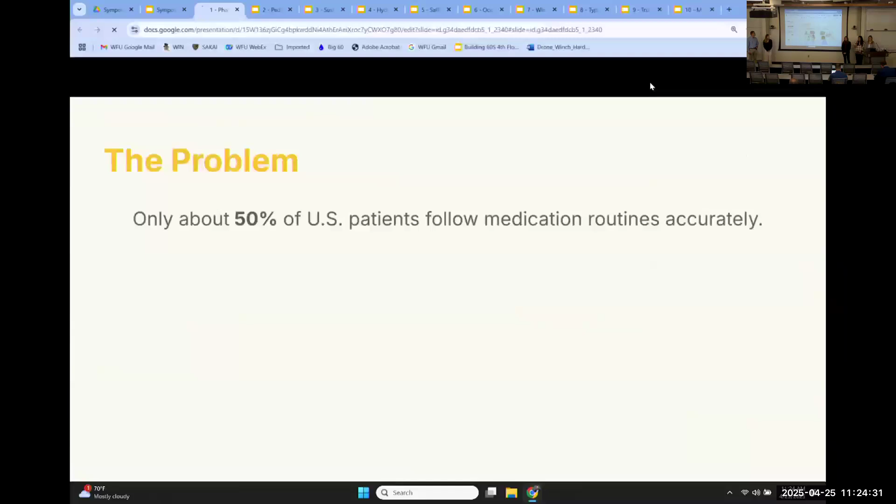So the problem is that only about 50% of U.S. patients actually adhere to their medication routines accurately, and this further decreases with increased age, increased dependence on caregivers, increased regimen complexity, and low health literacy. This results in consequences such as about $300 billion in annual preventable healthcare costs, about 67% of medication-related hospitalizations, and about 120,000 preventable deaths annually.

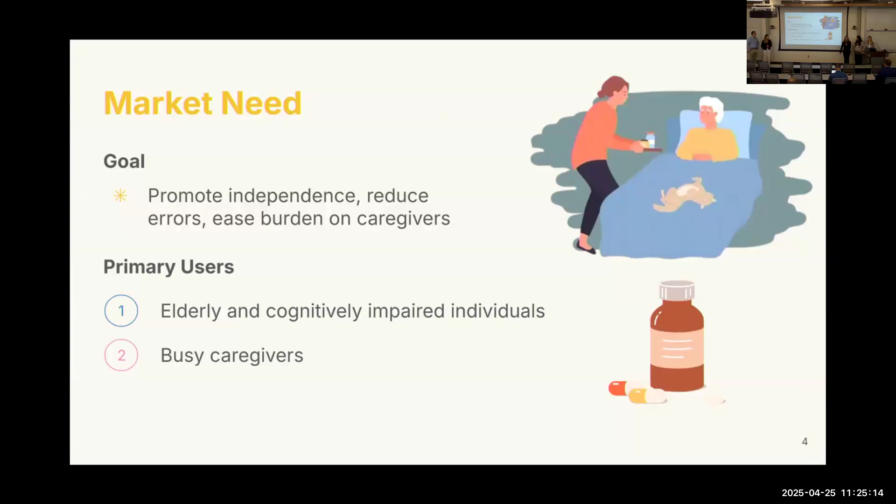Our market need and goal is to promote independence, reduce medication-taking errors, and ease the burden on busy caregivers. The primary users of this device would be elderly and cognitively impaired individuals, busy caregivers, as well as healthcare systems and home care services.

We've sorted the existing solutions into 3 separate categories. The first is pill containers, like pill calendars, which can range anywhere from $20 to $200, but the user has to manually put each dosage into individual compartments, which is very tedious.

Next we have prepackaged prescriptions—if you have a prescription with Amazon Pharmacy, you can get a pill pack for free with your dosages in them. These are made out of plastic, which is bad for the environment, and if you change your dosage, you have to order a fully new prescription, which can be wasteful. There are also fully automatic systems like the Hero, which require an app and Wi-Fi, and a lot of users complain about issues with setup and accessibility.

Also about the fact that this is a subscription service at $45 a month.

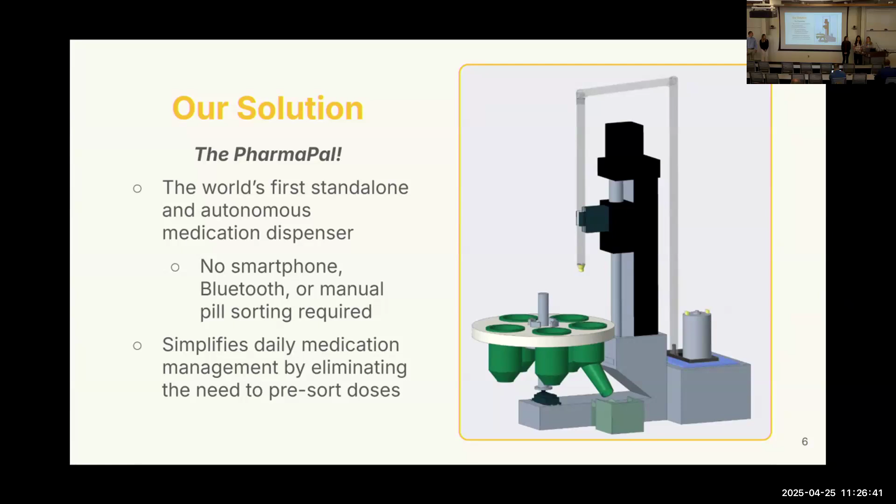Noticing the gap in the field after the team's background research, we decided to create a device that combines the good parts of each solution while tackling the more negative aspects of each. Through this, we created our device, the PharmaPal, the world's first standalone and autonomous medication dispenser. This is great for users because there's no smartphone needed, no Bluetooth, or any manual pill sorting required, drastically reducing the burden on both caregivers and medication takers by eliminating the need to pre-sort doses.

There are a few key components we incorporated into our project. The first is where do the pills go? Into the pill containers, which hold up to a 90-day supply. To choose which pill, we have a rotational motor that spins the pill holder around to pick up the pill.

We decided a vacuum pump was the best way to pick up the pill, since there's not much friction and it allows for ease of use. The vacuum turns on, and a linear actuator pulls it up and down to pick up the pill. Then to test that we have the pill, we use a pressure sensor.

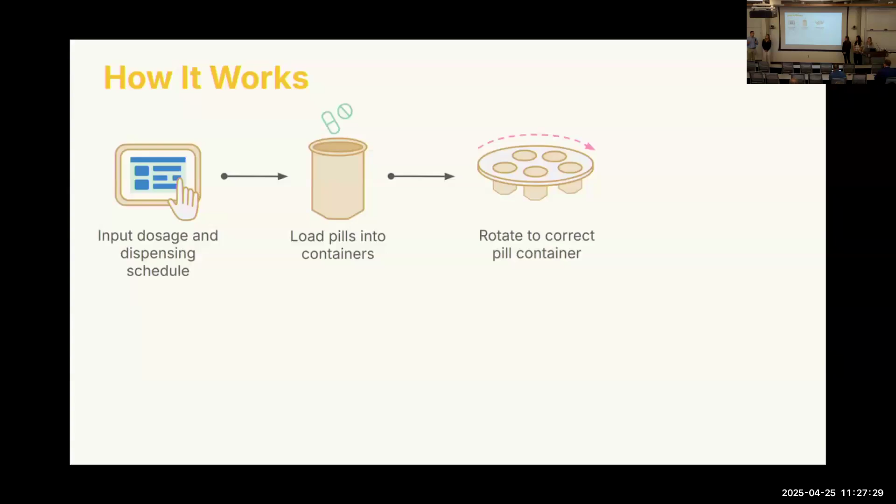I'll go over how it works. You input your dosage and scheduled time, then load the pills into the containers, up to a 90-day supply. At the right time, the device spins the rotational motor to the correct pill, the linear actuator goes down to the bottom of the pill holder, and then picks up the pill with the vacuum.

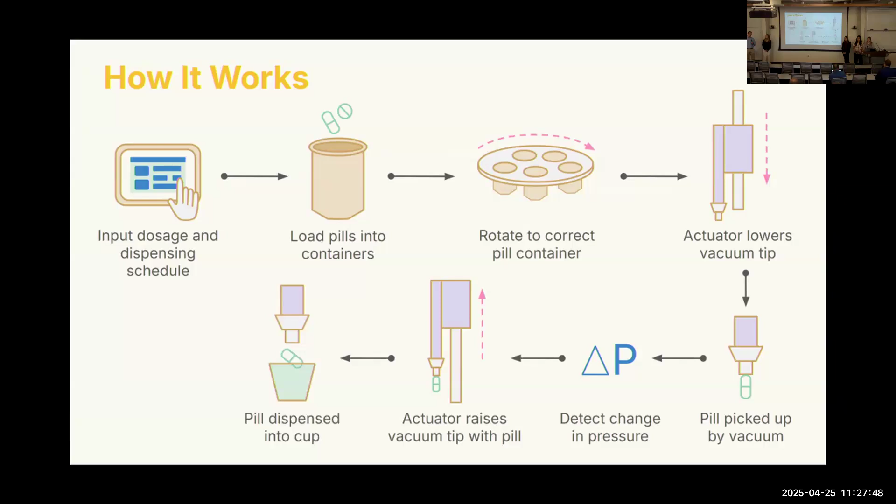The pressure sensor then checks the pressure. If the pressure decreases, meaning the vacuum has made a seal, it continues up. If not, it tries again, rotating the linear actuator or rotational motor again and dropping the pill, repeating as many times as needed.

While it seems pretty technical behind the scenes, it's very simple for a user in their daily routine. First, you input your dosage and dispensing schedule for each medication type. There are four different types of medication you can put in, each with up to a 90-day supply, loaded into their designated containers.

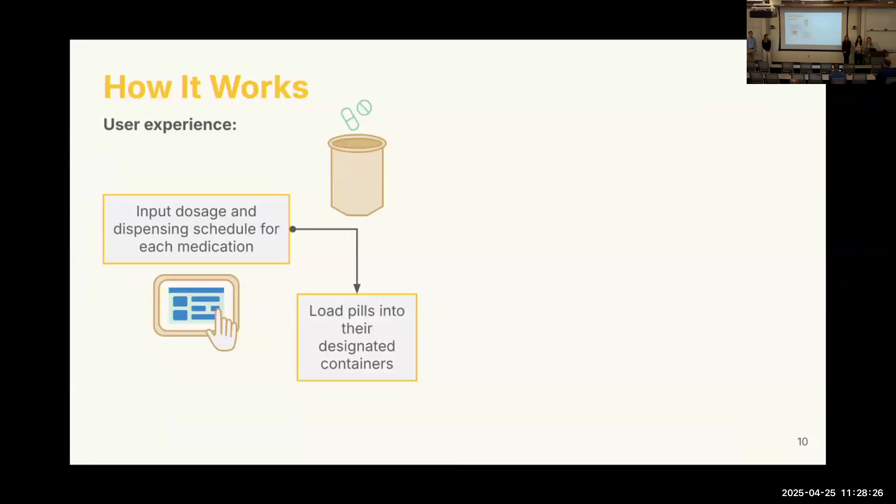Then we wait for the dispensing time, when the machine begins its process, rotates around, picks up a pill, and finally the user collects it from the retrieval cup and takes their medication. This makes it very simple for anyone with cognitive disabilities or increased age.

During our testing phase, we've looked at three specific factors: dispensing accuracy, dosage accuracy, and timing accuracy. Dispensing accuracy relates to the successful pickup and dispensing of a pill into the retrieval cup. Dosage accuracy relates to the correct amount of each pill type being dispensed, and timing accuracy relates to confirming pills are dispensed at the scheduled times inputted by the user.

We've conducted exactly 300 tests with a 90% success rate, and within the last 268 tests, we have a 100% success rate. So we are confident in saying our device is 99% successful over a 90% confidence interval.

Going forward, we'd want to add a filling function to help users fill the pills easily, as well as code to count and verify remaining pills in the container, with a weight sensor to weigh the total 90-day supply, and as pills are dispensed, recalculate the weight to check for remaining pills.

We'd also want to focus more on testing specific cases, like when there are only a few pills left in the container, and make the device battery powered in case power goes out. We'd also want it to support more than 4 medication types, and lastly, instead of using Arduino, especially for our interface, we'd want to use Raspberry Pi, because the user interface with Arduino caused us a lot of problems.

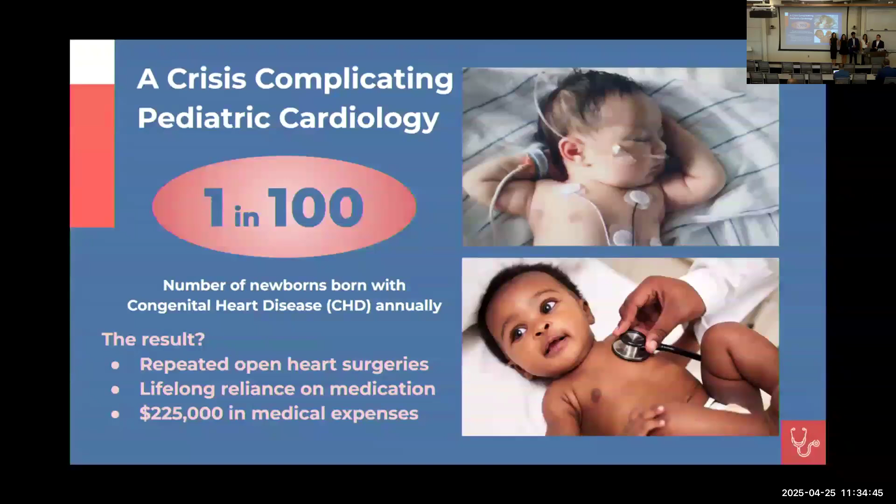So why the PD valve? Currently, there's no device that exists for catheter-based aortic valve delivery in infants. There are only two options. The first is open heart surgery, which is costly and invasive. The second is constant monitoring of conditions during childhood, which poses immense risk. What do we need? We need a safer, less invasive solution.

We looked into materials such as cobalt chromium as well as nitinol for the frame, to leverage existing mechanical properties within the space, as well as Gore-Tex/ePTFE for the skirt, because of its biocompatibility as well as reduced risk of immunogenicity. We even considered coating the metal frame with an anticoagulant drug such as warfarin.

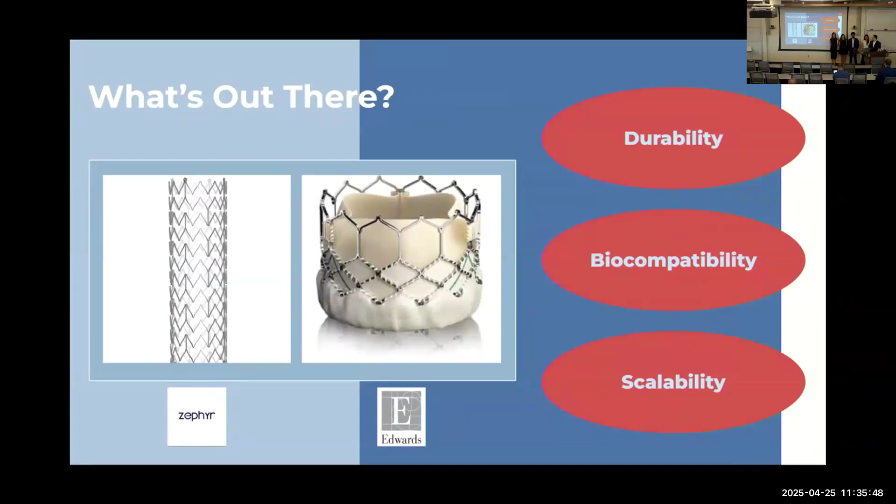To ensure that we weren't designing this product within a vacuum, we consulted an array of pediatric cardiologists as well as cardiothoracic surgeons to gain useful insights into what the main obstacles are within the space of pediatric heart valve care. We identified that for our patient demographic, there aren't many minimally invasive interventional procedures available, and many of these patients have to undergo high-frequency interventions over their lifespan, even becoming overly reliant on long-term anticoagulant use.

With this newfound insight, we took a step back and analyzed under a clinical as well as engineering lens what the most important features were that we were trying to accomplish within our device, in order to move in the right direction and in accordance with our time as well as resource constraints.

We took our gear to SolidWorks. This is a software that we use to create the valve. You can see our early iterations right here don't exactly match what we were looking for—they don't look exactly like what was shown.

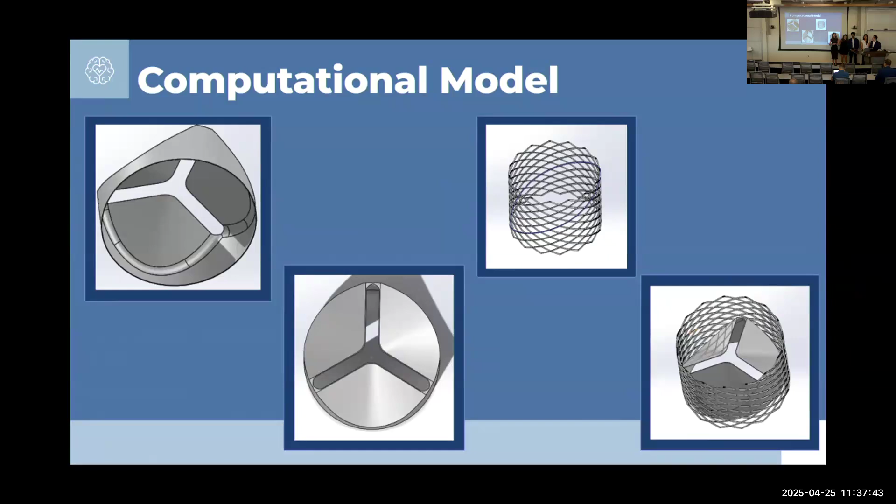So this brings us to our final prototype. This is our SolidWorks model. It's made out of PTFE, which is a plastic fabric—it's incredibly durable and non-reusable. It's surrounded by a nitinol and titanium cage. As you can see, there are two separate parts here, and then we can combine them together. This model can be used for computational fluid dynamics.

So what does this look like off the screen? We were able to actually create some prototypes. These are all to scale physical fit-testing models. You can see that we have a cobalt chromium frame in an early iteration layer.

It was a bit too stiff and a bit too wide for what we were looking for, so we switched to nitinol. It's a lot more flexible and durable, and can actually adapt to a little bit of growth in the child's heart. Additionally, a child's heart has less blood pressure, so it would be good for that.

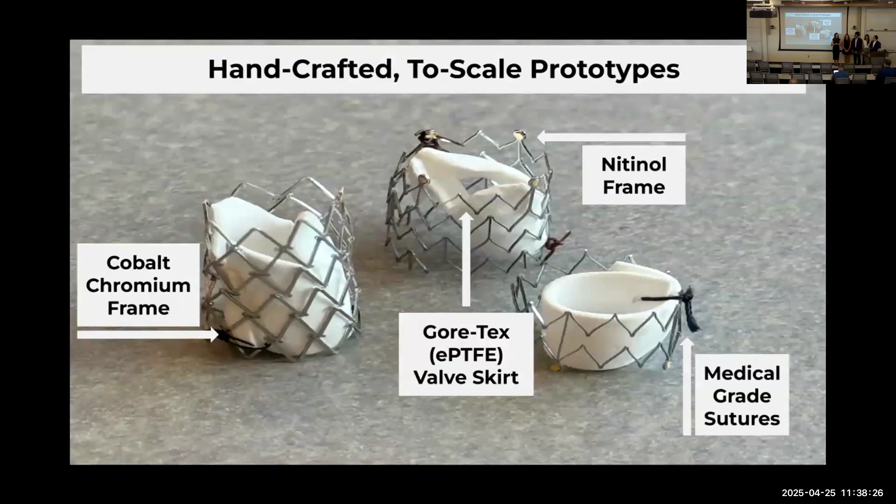So not only did we create physical prototypes, but we also really needed to focus on a computational model to show that our valve could withstand the pressure and velocity seen in blood flow. So this is just an example here of, at max blood pressure, what the velocity of the blood going through the valve would look like.

This shows the pressure and velocity and what the difference in gradient is between flowing through the valve, and this was created based off of values found in research with this size valve, as well as through calculations.

We're very proud of everything we've been able to accomplish throughout the year, and we've gotten nothing but great feedback from all our stakeholders. We've been able to create a modeled valve, simulated performance, as well as prototype design. These three big accomplishments have allowed us to bring a drug-free future as well as transcatheter access.

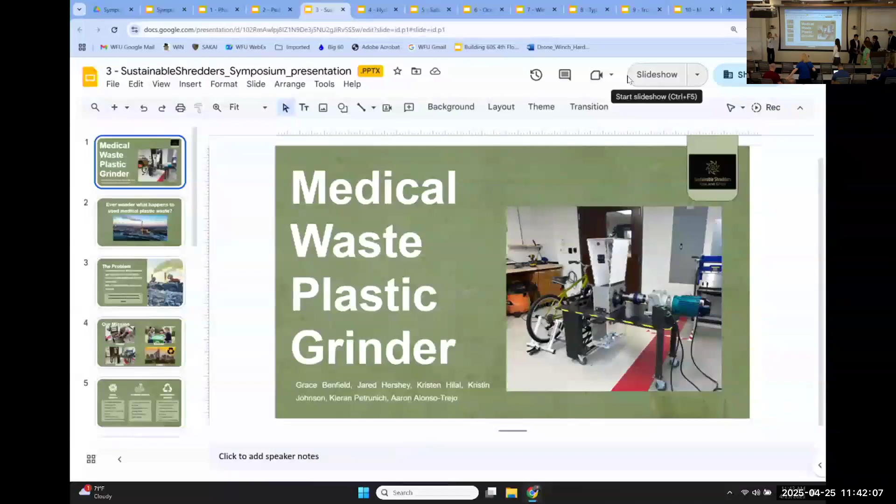Oh, whoa, weird. How'd that happen? Okay, weird. All right, sorry y'all. I guess we were testing these. We overplanned. Thank you for letting me know. Do y'all want two different?

Hi everyone, we are the Sustainable Shredders, and for our project we built a medical waste plastic grinder to be implemented in Atrium Health's new STEM lab in Charlotte, North Carolina.

Have you ever wondered what happens to used medical plastic waste, like pill bottle containers or syringes? A lot of these plastics that present no biohazard risk still end up in incineration plants. So our thinking was, how can we use this plastic for something better?

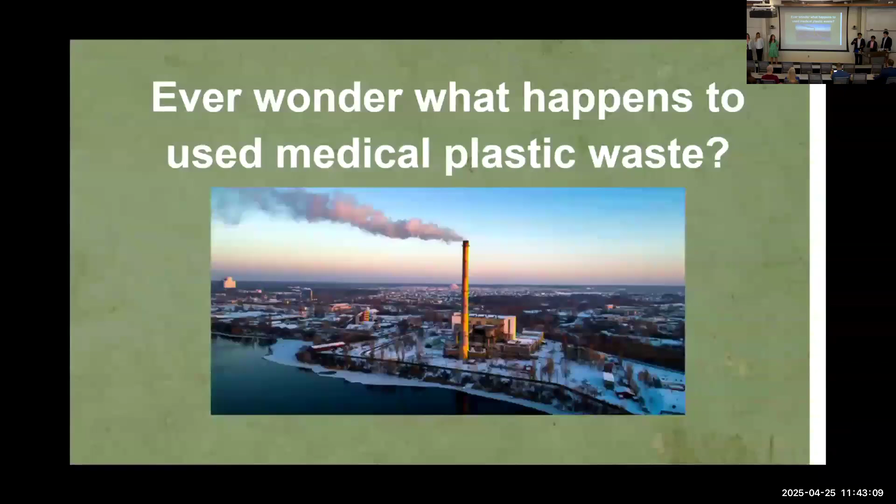So we designed a medical waste plastic grinder that can help upcycle these plastics and teach students about upcycling and engineering in a creative manner.

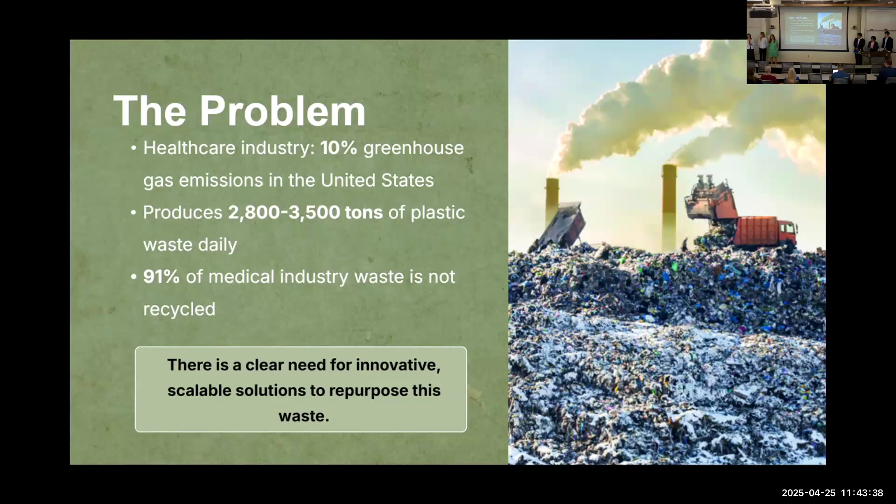Let's take a step back and think about the broader impact healthcare has on the environment. The healthcare industry produces 10% of the greenhouse gas emissions in the United States, which is a huge amount for a sector meant to heal people. It produces tons of plastic waste daily, and 91% of this plastic is not recycled or upcycled in any way. So clearly there's a need for an innovative, scalable solution to take this waste and repurpose it.

Our mission statement is that not only do we want to create a machine, but also be interactive with other students and educate them about the positive impacts of sustainability and upcycling, and even educate them on real-world power and energy concepts through our plastic grinder. We also try to inspire future engineers and lead the charge in Charlotte, North Carolina regarding the plastic medical waste crisis.

Looking more closely at some of these impacts: first, the social impacts. We're going to help educate students on sustainability and engage the local community in upcycling efforts, and we will also help support Atrium Health's STEM initiative in their new hospital.

Economically, this could help hospitals possibly save some money. Instead of paying someone to get rid of the plastic, they could possibly reuse it. Scaling up this project could help add to the savings, both in disposal costs and in the value of what the plastic becomes.

Looking at the environmental impacts, we can help reduce plastic waste through upcycling. We can also use our bike-powered system to not always use that motor and create fossil fuel emissions that way. And we can also promote a circular economy in healthcare, which Kristen will talk about more.

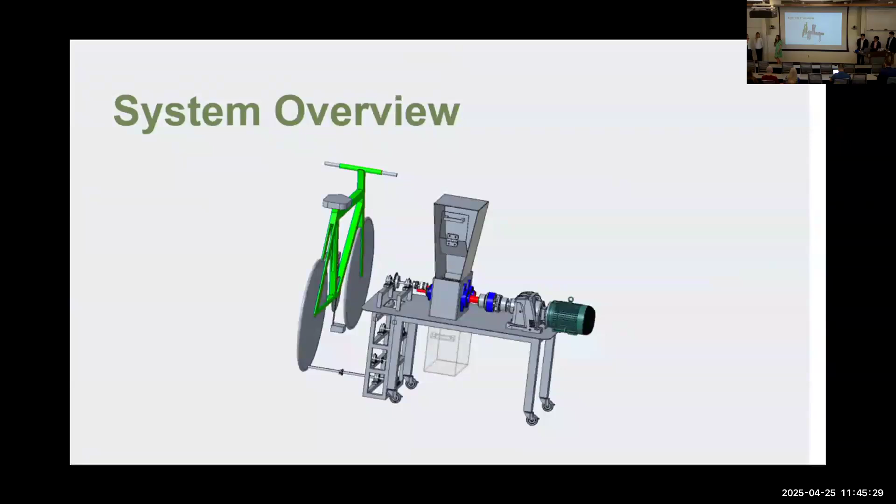Our solution is a closed loop solution that connects healthcare, sustainability, and engineering. It all starts at Atrium Health, where by treating patients they throw away tons of single-use plastic devices every day. This plastic gets collected and given to our project.

The students in the exhibit can input the plastic waste through the chute at the top. The enclosed acrylic chute promotes sustainability, accessibility, and education. The plastic waste falls onto the grinder blades, which get power from either a bike or a motor, and then turns into plastic flakes. These flakes will be used for upcycling, either in 3D printing or injection molding, any way to make other medical devices that will ultimately go back to Atrium Health, closing the loop and reducing waste.

So comparing our two sources of power, we have a motor and gearbox and a bike and chain. The motor and gearbox represent more of an industrial solution that can be upscaled to really create a widespread difference in the plastic issue. This is a really high power solution, taking 230 volts from the wall. But this also represents kind of the downside, where this is not something that everyone can access.

It's also really expensive and just not really feasible for the everyday person. On the other hand, the bike and chain is kind of more of an approachable solution that anyone can reasonably do with some money and some engineering skills. This is allowing us to really educate people on how much power is going to be needed to grind up plastics. And the downside of this is that human power is less powerful than the wall power.

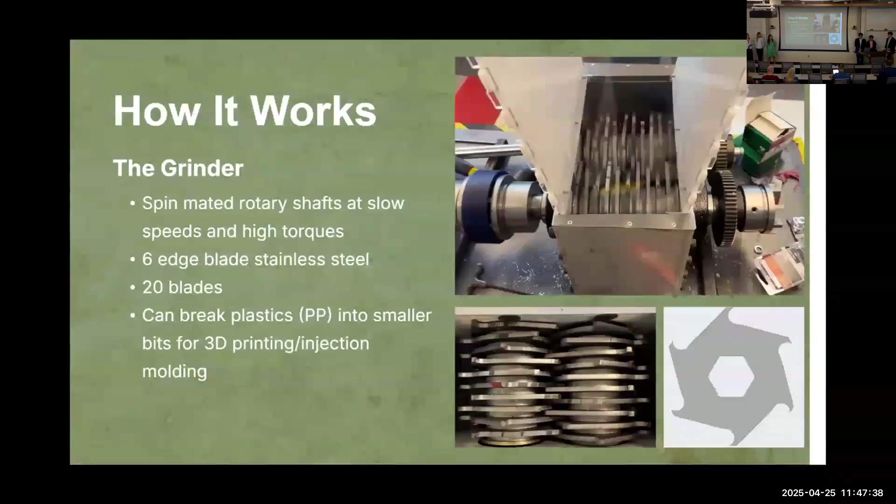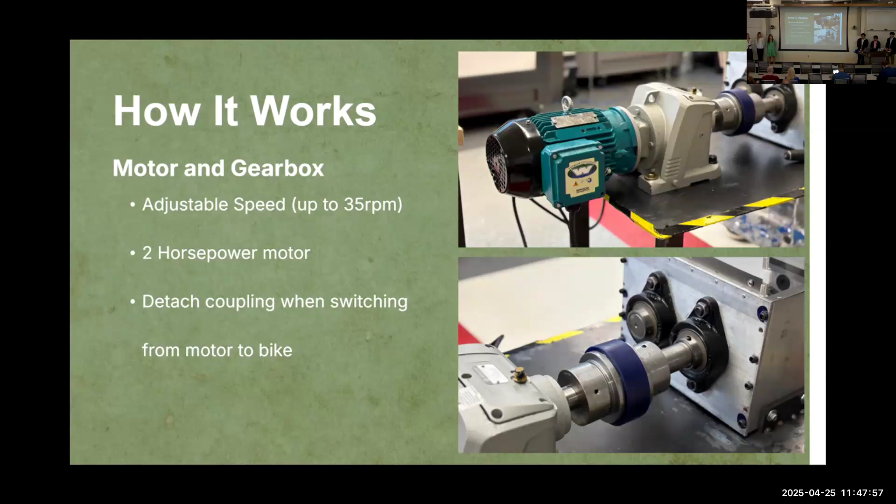So here you can see the motor and the gearbox. The gearbox is the silver element on the right, and the motor is the blue one on the left. The motor spins at a very high speed but low force, and the gearbox just reduces that speed to get our force up to the necessary amount. This is really expensive, but it's high power.

Now looking at our bike system, we had to make a few modifications before we could apply it to our system. We wanted to lock the rear gears to prevent the user from interfering with any added parts that we had. We added a second chain to the back cassette so that we could take the output from the human and put it into our system. We also removed some unnecessary components like the kickstand and rear brake just to declutter our system.

So now once we get the power out off of the bike, we have a custom-made gearbox. We use chains, gears, and bearings to increase the torque and decrease the speed. And like Jared was saying, to get that similar torque output used to grind plastics, we need to reduce it more, and we have a lower speed.

So what's coming up next is that this project will be a continuing Capstone project for next year. There will be a need to see some improvements, such as refining the grinding system, making it more aesthetically pleasing, and then adding to the application material.

So then after that, as Greg said in the beginning, this will be going to Atrium Health's brand new STEM education center, where students from kindergarten through 12th grade will be able to use it as a part of sustainability programming, and hopefully help us create a cleaner future. Thank you.

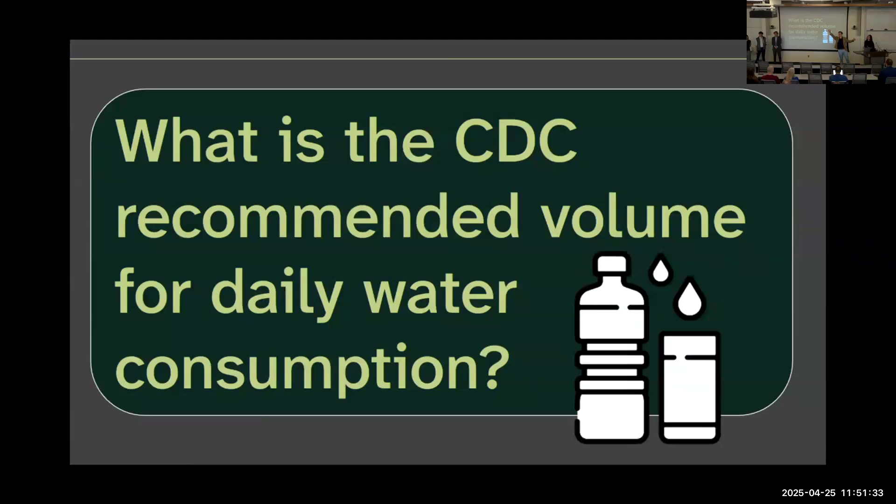Can anyone here tell me what they think the CDC recommends should be someone's daily water consumption in liters? Five? Can be more than that. Good guess. So, hands in the back. Seven? Still more than that. Anybody? In the corner there, you got a guess? Ten? Oh, we're gonna double that. It's actually 20 liters per day. And so, for context, that's about 80 cups of coffee.

To address this, our main stakeholder, Dr. Dickinson, designed a gravity flow scheme, utilizing the power of gravity to deliver fresh water from higher elevations down to these local communities in the Rwenzori Mountains.

Here's how it works: there's a river up in the mountains. This goes through a slow sand filter where all the contaminants are filtered out, making it potable. That water is then stored in a reservoir where it can be pulled using gravity through pipes. However, when you go through these pipes, a lot of pressure is built up, so you have to release that pressure back to atmospheric pressure in things called break pressure tanks, seen there. From there, it can be delivered at a safe pressure and a constant flow rate to local taps, delivering fresh water to these local communities.

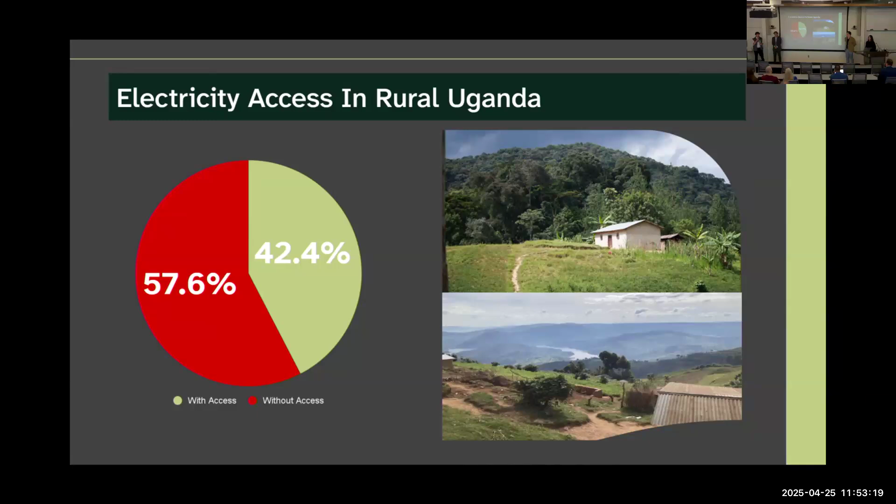Now, having addressed the issue of water, he realized there was another issue: electricity. In rural Uganda, roughly 57.6% of people don't have access to electricity, and in these really remote locations, that number is a lot higher. So what are we going to do about that?

Given these twin issues of water access and electricity access, we derived a set of system requirements we want our solution to address. The first one, and our biggest priority, is actually drinking water. First, we want to maintain the pressure and flow rate at the access taps. We also want to avoid contaminating the water since it is drinking water. And finally, we want our system to be resilient enough to last the 20-year lifetime of the gravity flow scheme.

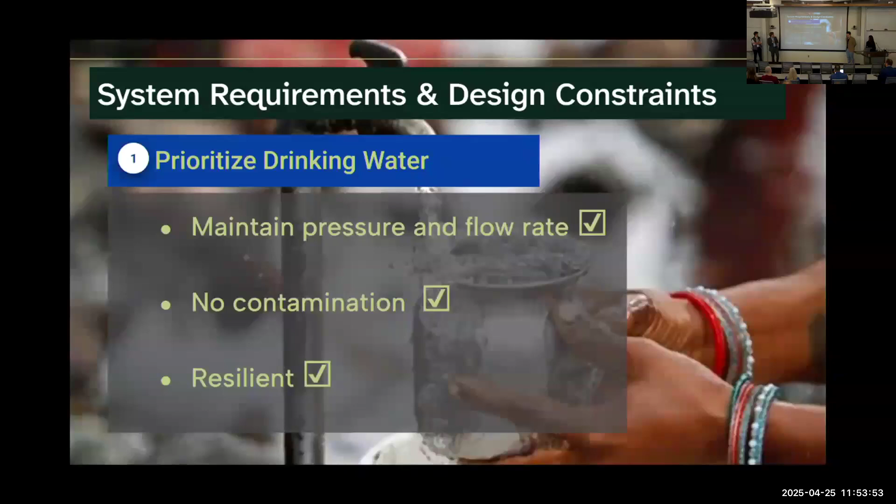The next thing we want to do is provide electricity. We want to be able to do this safely, and in a way that is accessible to the community, as close to where they live as possible. Finally, we want it to be temporally accessible as well, so that electricity can be accessed even when water is not flowing through the system.

The last thing is also on that theme of accessibility. We want our system to be modular, meaning it can be implemented anywhere in the gravity flow scheme. We want the parts of our system to be purchasable in Uganda, and we want them to be available at a reasonable price so our community can afford the electricity.

So what do we plan to do about this? That's why our team has designed a hydroelectric generator designed to work with the break pressure systems and tanks in the gravity flow scheme, comprised of a Pelton turbine and a permanent magnet alternating generator that will take all that pressure and turn it into energy we can use.

If you can recall, this is the visual map of it. This is the service area where all the water's being drawn from, and all these yellow squares you see here are the break pressure tanks. Our team picked out a square here in the middle where we found we could get the most available power that is near the most amount of residents in the area, so it's more easily accessible to them.

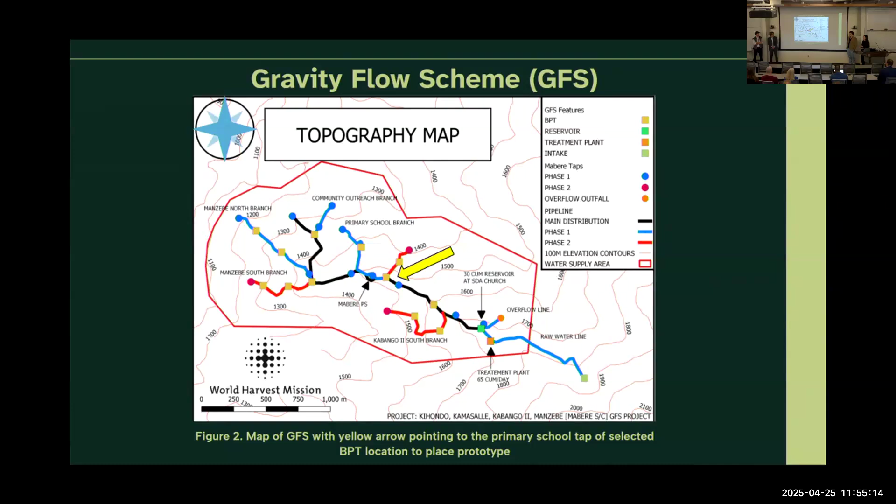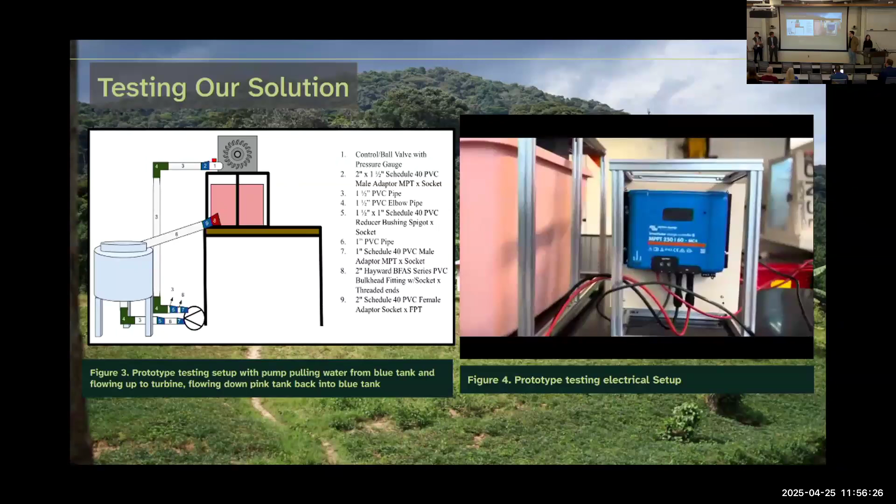On the electrical side, as the Pelton turbine spins, it's attached on the back to a permanent magnet alternator. This creates electricity while it spins, going through a charge controller, which effectively controls the current coming in, making sure the batteries don't overflow on current, then through a battery management system into 4 lithium iron phosphate batteries in series, totaling 12.8 volts, into an inverter, and finally to our end user where we can charge.

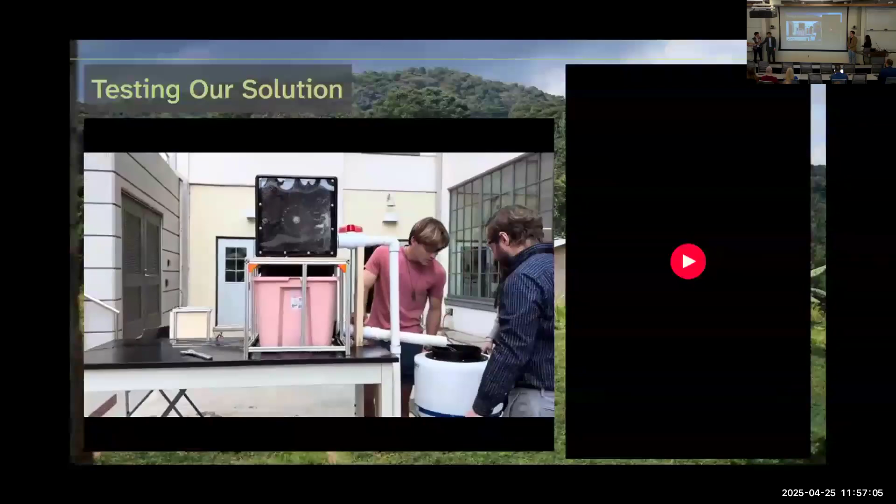So this is more of a close-up of the turbine. As you can see, it's running pretty fast right there, so it's hard to get a good visual of it. And then right on the backside, simultaneously, the generator is also working with it to produce that power.

So having tested our system, the first thing we noticed is that our pump actually was not able to match the conditions we were expecting in Uganda. Instead of giving us 55 meters of head at 1.5 liters per second of flow rate, we instead got 30 meters of head at 0.6 liters per second. This means instead of having access to 780 watts, our turbine instead only sees 180 watts. We're still able to produce power, about 40 watts at 22% efficiency, but we were expecting to get 460 watts at 58.9% efficiency.

However, we are not dissuaded by these results because of the way that our alternator works. The alternator is designed to work at 1300 RPM, and it's only given 500 RPM. Alternators have higher efficiencies at the speeds they're rated for, so 1300 in this case, and they'll have a much lower efficiency at a lower speed like the one that we gave it.

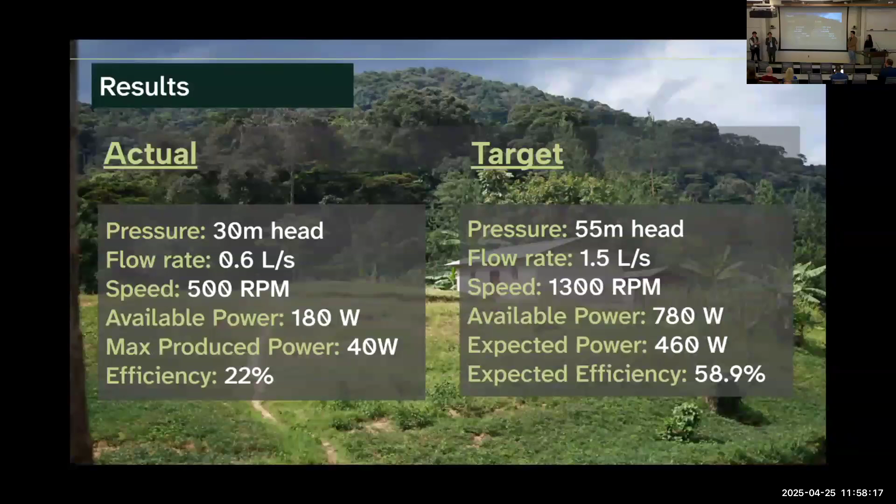So given that we're not able to verify our expected power, we were able to demonstrate proof of concept, and we were able to show that we could produce, store, and deliver electricity safely and reliably.

So where do we go from here? First thing we want to do is be able to actually simulate full conditions of the system in Uganda. That means getting a stronger pump, hooking up to our system, and actually getting that 50 plus meters of head and the 1.5 liters per second flow rate. We also are thinking there are ways we can adjust the nozzle diameter, maybe to give us a better flow or a closer flow to our actual system. And then we want to prepare future teams, hopefully, to continue this project to get it closer for potential actual implementation in Uganda.

Thank you all, and let's make every drop count.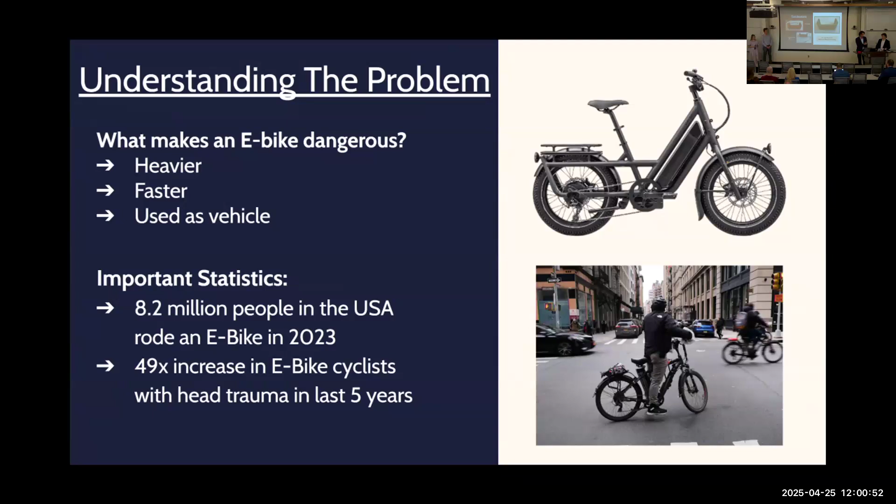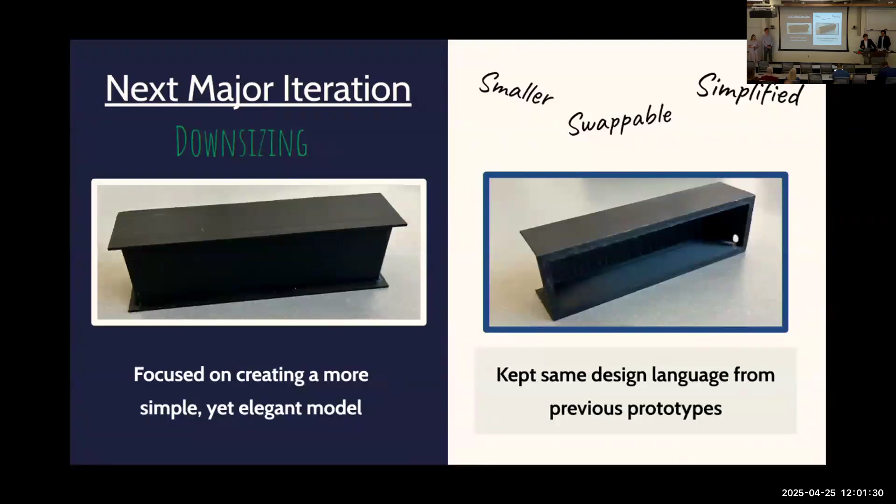It's smaller, it's swappable, and it's more simplified. The issue with this one, though, was it was not optimized for our internal electrical components. Finally, we then moved to the final iteration, which has a sleek design, more optimized space, better lighting angles, and it's made entirely out of glass fiber ABS, which is better for weathering conditions.

So while we were figuring out the shell, we were also figuring out what light we were going to do, because it's a brake light. So we ended up deciding on 4 different modes: standard setting, slow braking, extreme braking, and turn signal.

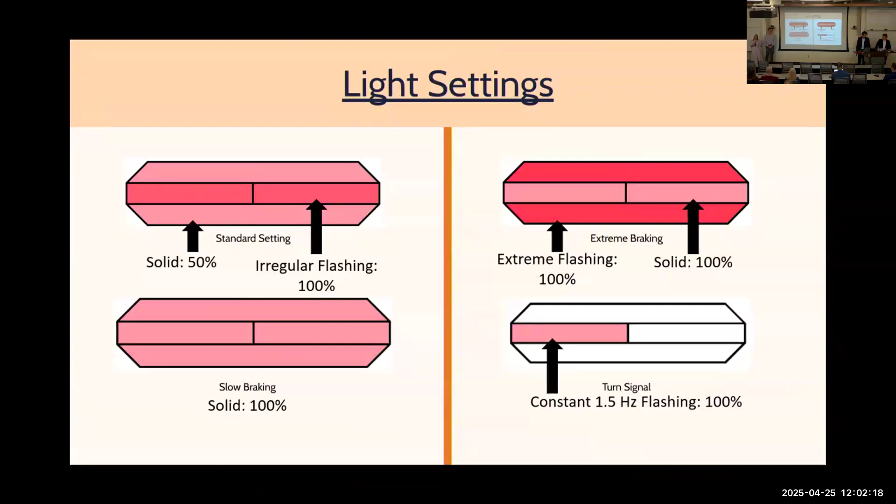On here you can see what each one's going to be flashing. Basically, the standard setting is you're just riding along, not slowing down, just having fun. Slow braking is kind of self-explanatory, you're slightly braking. Extreme braking, Bambi is in front of you, we don't want to hit Bambi, so you're extremely braking. Turn signal, also self-explanatory, but we have a Bluetooth module connected to the handlebars where you're able to press the button that indicates the direction you're turning.

Once we figured out the lights and had the shell, we had to figure out what we were going to cover the lights with, so our lens cap. We 3D printed using a red translucent PETG filament, which is stronger than PLA. The design is supposed to perfectly fit the outer casing of our shell while also providing great light diffusion. So now that we understand what we're working with, let's talk about the testing and engineering behind our product.

Let's get into really the heart and soul of the adaptive brake light, the electrical system. This system is built on an Arduino Pro Mini, which is really the brain of this entire operation. We chose the Pro Mini because it's a compact size, it is very capable for what we needed it to do, and it has good memory capacity for the programs we would be uploading.

This interfaces with a GY521 accelerometer that captures acceleration data from the bike as the rider is going along and braking at different intensities. With this information, the Arduino makes a decision to activate one of the 3 different braking settings. But how does the Arduino decide when to activate which setting? For that, we had to find some braking thresholds.

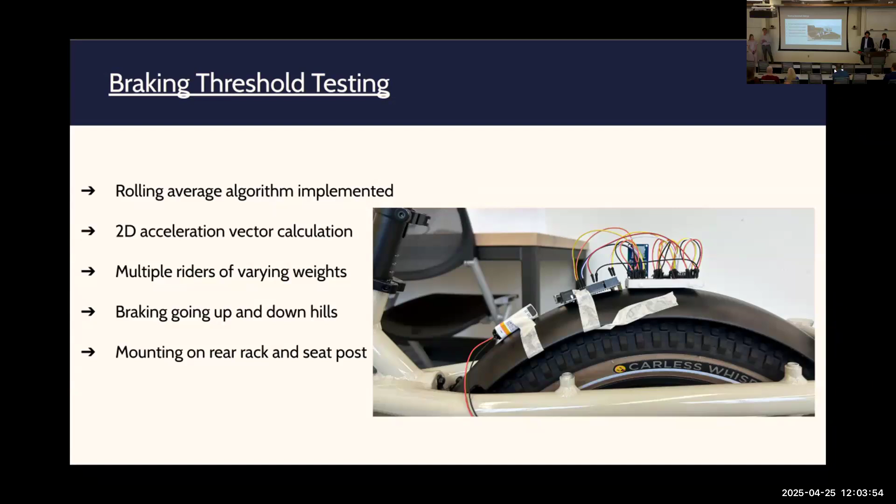To identify these thresholds, we did some testing and created a test module that we placed on the back of the bike, and we ran several tests with a few different riders, different stopping distances, and different starting speeds. From these tests, we developed our 3 braking thresholds.

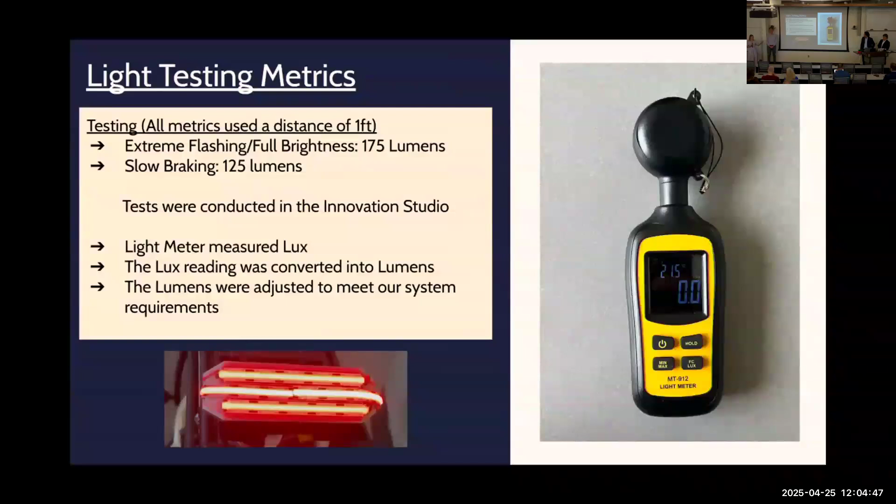And we've done some testing on the reliability and accuracy, and the distance between the handlebar and the adaptive brake light on the e-bike.

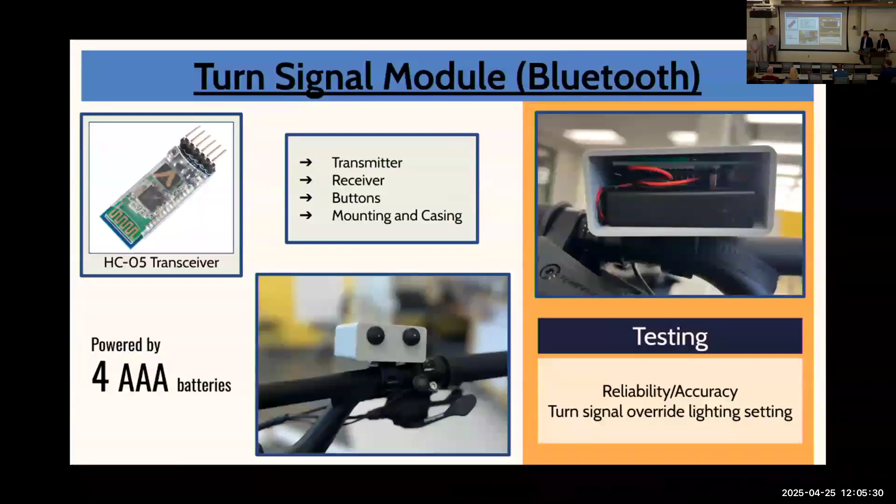So now that we understand exactly what we're working with, let's see how it works. Johnny's going to quickly explain what you're about to see in the video. So we have a video of our prototype.

Unfortunately, this morning we were having some issues with it, so we could not bring the working prototype in here.

In the video, you will see we have our 3 different braking modes: the standard, slow braking, tilted up, and then all the way up to that extreme flashing. We're using gravitational acceleration to trigger the accelerometer instead of shaking it really hard to get the different modes. But those are the 3 different modes we have.

That is our prototype, which we will have working obviously for Monday. Yeah, that's it, and we'll take any questions. Thank you.

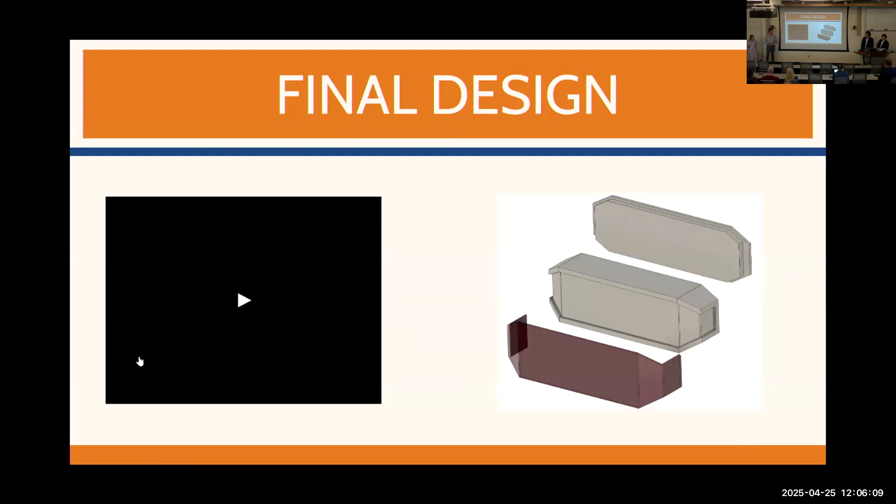So the housing itself is powered by an 11-volt LiPo battery. This interfaces directly with the Arduino. It can take up to 12 volts of raw power. It also goes directly to, kind of hard to see in there, it's a bit of a mess in the back of the wiring, but this goes directly to all the components. And luckily, this was able to power the LED strips without the use of a boost converter, which we were initially thinking we would have to use.

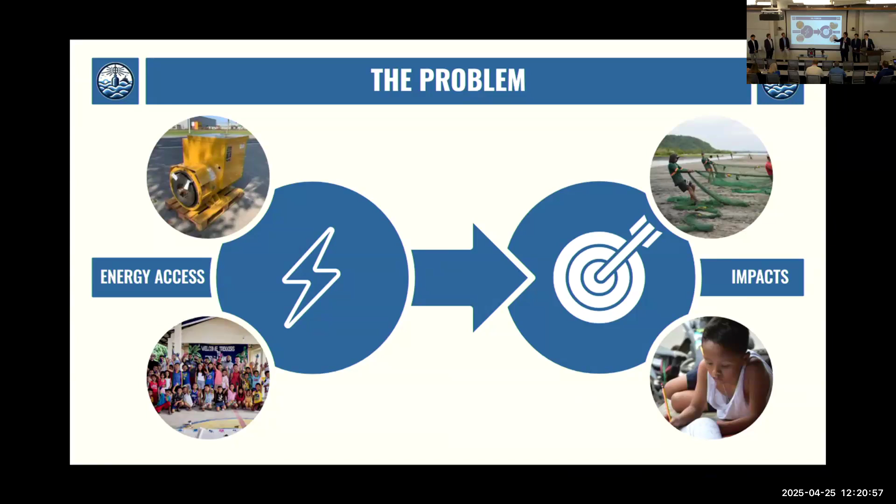Another very important factor is the feedback we got when communicating with these communities: children can't study at night. Once the sun goes down and you can't afford that $1 a day for the diesel generator, you have to go to bed. It's very hard to function. So our idea of being able to supply these communities with some reliable source of electricity was very important to us.

And that brings us to our mission statement: to introduce a cost-effective and renewable energy source to generate usable electricity from the power of the ocean. In other words, we want to create a system that will convert the natural kinetic energy from ocean waves into mechanical energy, which will then spin an electric motor, turning into electricity. I also want to clarify that the goal of this project was not to reinvent their grid, but mostly to be a supplemental power supply for things like light bulbs or phones.

All right, now we're going to take you through our prototype process and just show you how we got to where we are now.

So from our mission, we set out to create a buoy that would harvest the energy of the ocean wave. Our first prototype we refer to as the aquatic line, which was pendulum-based, and it failed. The second was the avian line, which was rotor-based, designed similarly to the rotor of a mechanical watch. That failed too, so we took a break, felt defeated, and came back ready to dive back into research, which led us to our third prototype line, the amphibious line, a vertically leveraged buoy system.

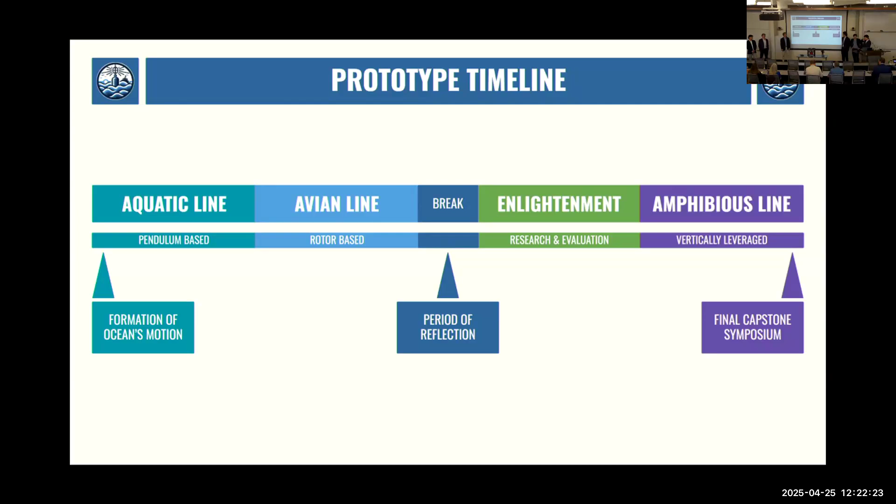Going back to the very beginning, at the start we were trying to harness the horizontal motion of the waves. We were thinking like a ship rocking back and forth, our buoy would do the same. So that rocking back and forth led us to create a weighted pendulum system. As Mason mentioned, it didn't meet the qualities we were hoping for in design, so we pivoted.

For our second line, the avian line, those of you familiar with a mechanical watch know the weight in the watch that we took inspiration from. We were also trying to leverage the horizontal motion of the waves, seeing it as the watch would spin around. We would also get an axle to spin 360 degrees, still focusing on the horizontal motion of waves, but still unsuccessful, so we pivoted once more.

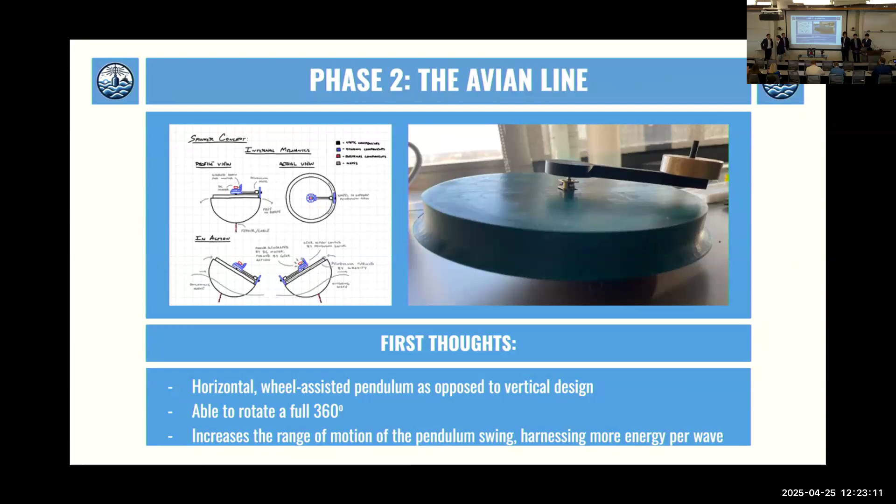After our second design failure, we went through what we call our enlightenment phase, which is basically just another way of saying we pulled it together. Our first step was to really step back and reevaluate our goals. We started this project very ambitiously. As Toby said, this is a first-year project, so no one had ever done this before. We began thinking we were going to be testing in the water by February, which was ridiculous.

But we stepped back and changed our goals to just the mechanical system you see in front of you. We'll leave the anchoring system, getting the energy from the buoy onto land, and the buoy shell all for later projects. Then we began to rethink the way we were designing our prototypes. We decided to go back to our research and change the target variable from the wave motion we were actually going to leverage to make electricity. That's how we ended up with our final model, a vertically leveraged buoy, which we're going to explain in a second.

And that brings us to the amphibious line, which manifested into our final model here, the axolotl model. Right here on the screen is our initial blueprint from our enlightenment phase, the outline of what we envisioned the axolotl model would become. We have a few key components we knew we needed to leverage the height of the wave, based on lessons we learned from the two other prototypes.

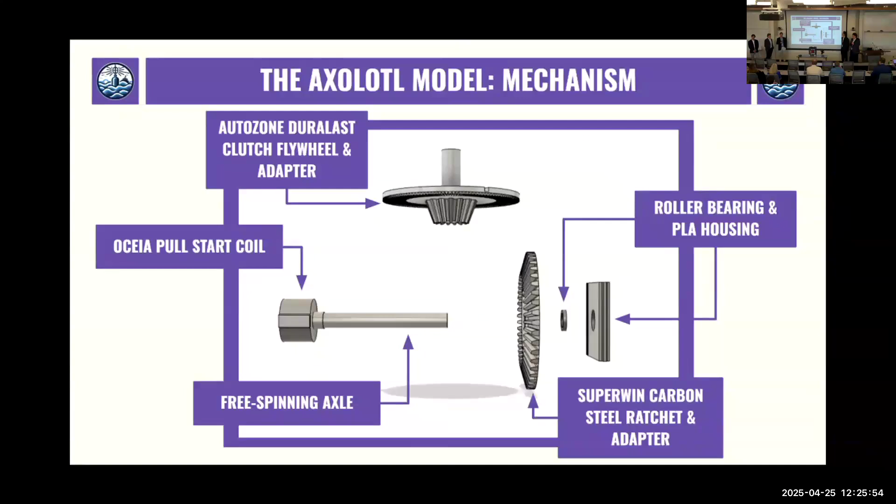Just to break down the main components: we have this pull-start, which spins our free-spinning axle, held in place by our roller bearing and PLA housing. Attached to that axle is our ratchet gear, which spins the flywheel, which then charges up the motor. Thank you. So, any questions?

For anyone who didn't hear, the question was how did our enlightenment phase affect our process. I think what happened with our group initially was that we were very excited to start prototyping, and that's what we did right away, without very specifically calculating each result, and it was fun. We had a very good time that first semester, but it was a failure every time because there were things we couldn't expect because we weren't doing our full in-depth calculations. So being able to do that engineering mindset of actually doing in-depth research and calculating till the very end has led to the successful prototype. Thank you for that question.

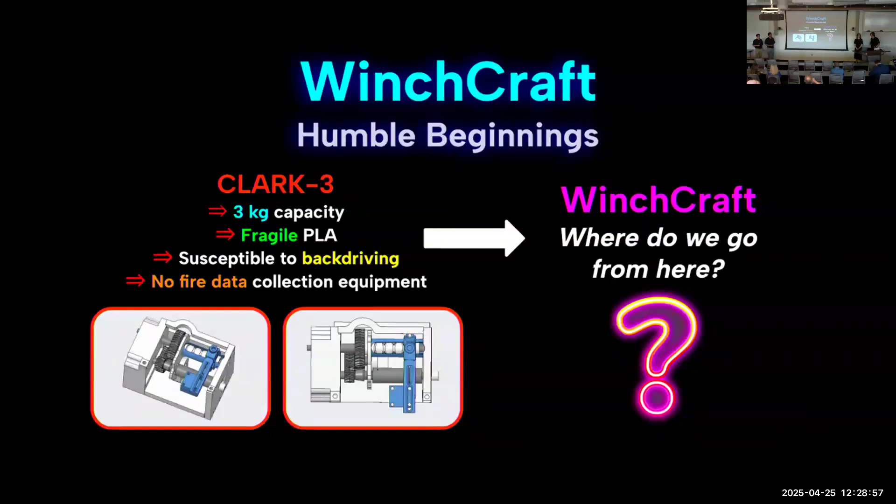With that being said, we would like to introduce the Clark 5T. The Clark 5T is a customizable light-duty aerial recovery kit with a 5 kilogram payload and a thermopod. Our team came up with a list of system requirements, with the most important one being that we create a functioning winch. We also challenged ourselves to increase the payload capacity from 3 kilograms to 5 kilograms and be able to spool 20 meters of line.

Secondly, we also wanted to develop a data collection system that would be able to withstand the high temperature environments of wildfires, which typically range from 800 to 1200 degrees Celsius. Finally, we wanted to be able to fully winch the payout line, reeling it in and out the full 20 meters in about 5 minutes in order to minimize damage to the actual winch.

The winch has 4 main components. It has a DC motor, which drives pretty much the whole system. It has a diamond gear level wind, which guides the spool so that we have minimal spooling issues. It has a worm gearbox, which produces high torque, and it also has a 26 gauge nichrome line, which will be able to withstand the 1200 degree Celsius high temperature environments.

The Clark 5T made design improvements in several areas, adding to its overall capabilities. Firstly, it can now support a 5 kilogram payload and can be lowered and raised 20 meters in just under 10 total minutes. Part of the problem with the Clark 3 was backdriving, where the payload is forcibly lowered due to the overwhelming amount of weight. With the addition of worm gears into our system, backdriving is essentially impossible, so the chance of failure has been significantly decreased.

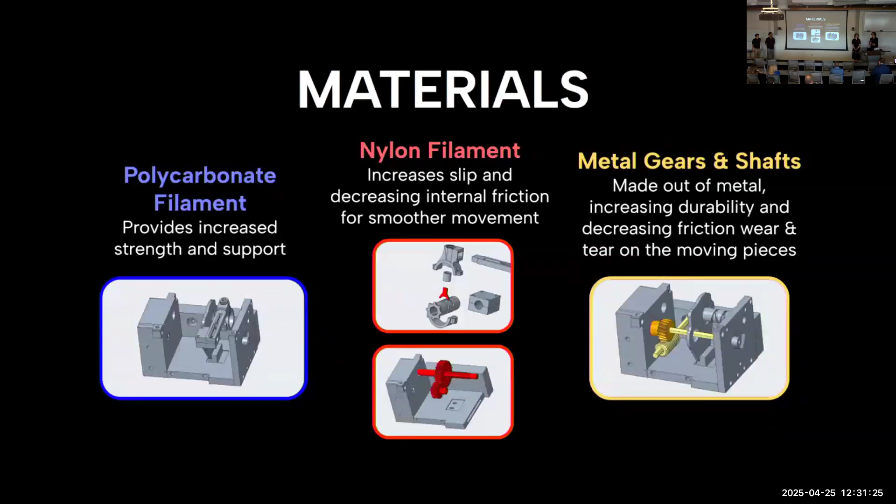So like I said earlier, the system is driven pretty much by a brushed DC motor, and we also needed a motor controller. We used an H-bridge in order to introduce bidirectional capabilities. Finally, we're using a Hall effect sensor to measure how fast we are spooling in or out, by embedding a magnet in the spool. Every time the spool does a full rotation, the Hall effect sensor will pick it up, and we can measure how fast it's going based on that.

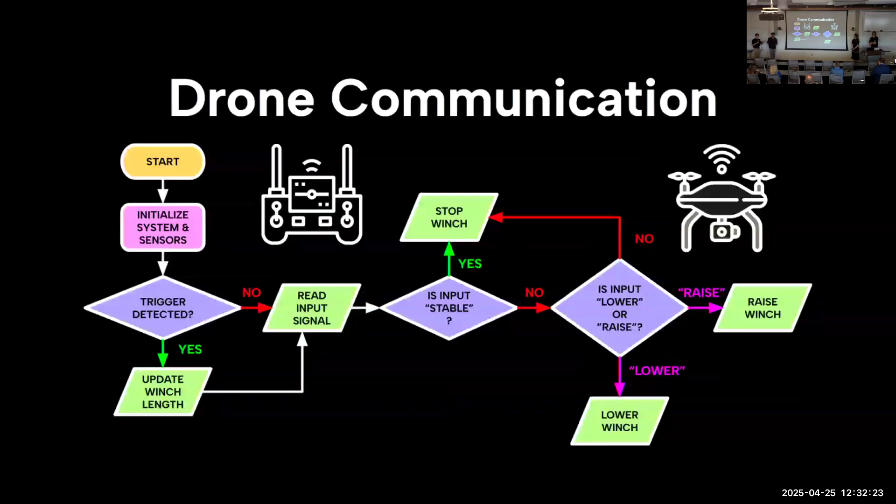In terms of communicating with the drone and the winch, the drone has a battery and it also produces a PWM signal. The battery powers the motor, and depending on what the PWM signal is, we can get the motor going either clockwise or counterclockwise, which turns the shaft in different directions, spooling up or down depending on what we want it to do. Now introducing the thermopod.

The thermopod is a capsule that allows us to hold our electronics at an operational temperature while also exposing the exterior of the pod and our temperature sensor to extreme conditions.

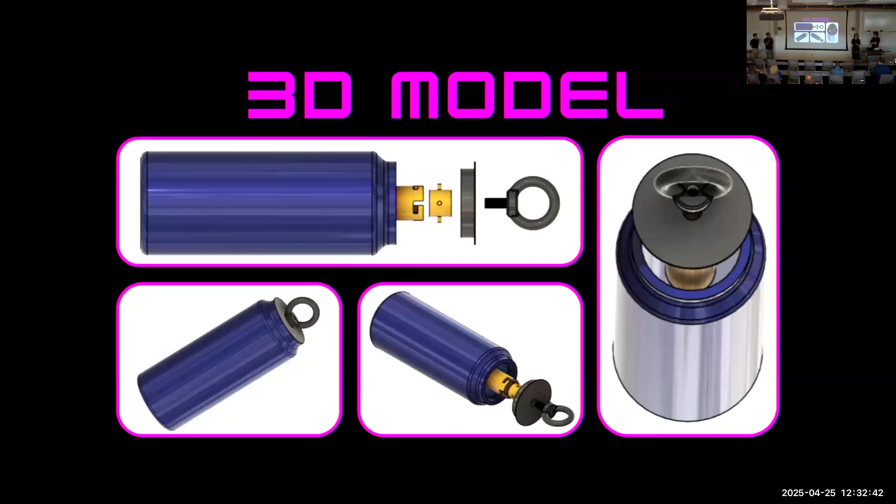The PCB is the brain of the entire thermopod. It has the microcontroller, which is an Adalogger Feather. It connects the data from the thermocouple and collects it into the SD card, which can be extracted by the user. Since the whole goal of the thermopod is to collect data, all of this electronics has to be protected.

To make our open source thermopod more accessible to a wide variety of users, we decided to prioritize repeatability. We did this by standardizing the manufacturing process as follows.

We first took our double wall stainless steel water bottle cap, in our case a Yeti Rambler, and made a silicone mold. With that mold, we took plaster of Paris and created a physical cap. Once we had the cap, we drilled a hole through it and fed the hollowed out screw through the hole, and were able to attach our lifting eye nut.

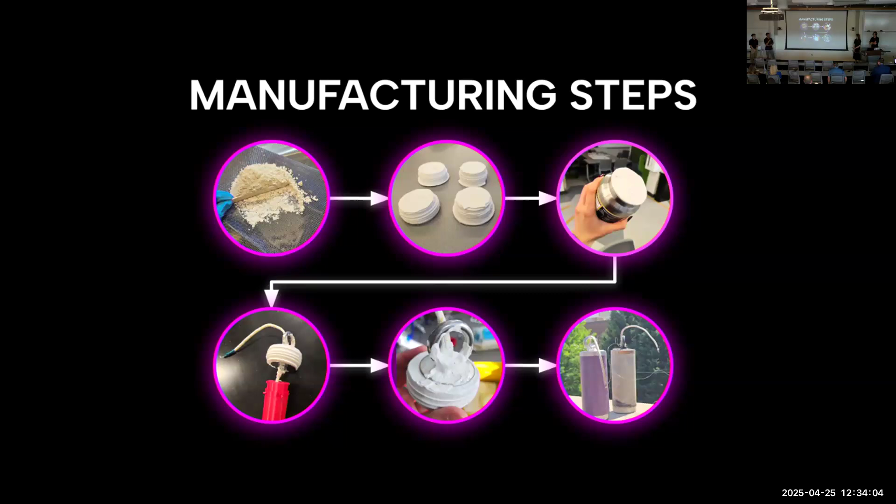After that, we took our thermocouple, fed it through the hollowed out screw, and sealed it with plaster of Paris, which also eliminates heat transfer to our electronics. After performing some destructive fire tests, we were able to quantify the internal temperature change of our system.

After 30 seconds of being in a fire pit, which was our system requirement, the temperature increased by 3 degrees Celsius. After 90 seconds, it increased by 11. And when we pushed it to 5 minutes, it increased by over 100.

But since 30 seconds was our system requirement, it means that we surpassed it by over 10 times, and our system also survived multiple active flamethrower applications for over 1 minute.

So we expect our product to save consumers a lot of money, considering that a lot of current market options are much more expensive. They could cost thousands of dollars, which could be more than the actual drone. It also increases safety for infrastructure, property, and environment. And then finally, it increases preparedness, so there's much improved wildfire response times.

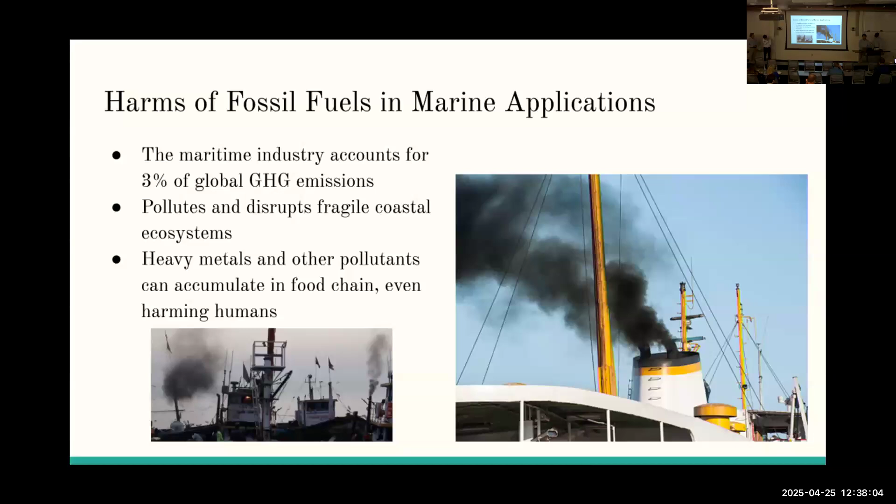Not only does this pollute these ecosystems, but these effects can also release heavy metals in the forms of oil and gas spills, which can eventually make its way up the food chain, and then not just harm these ecosystems, but get to the point where it's harming people themselves.

So moving on to our solution, the Promoting Electric Propulsion Competition, or PEP. This is hosted by the American Society of Naval Engineers. In this competition, we were competing against much larger, higher funded schools that had better access to financial and technical resources that we just didn't have access to here. The goal of this competition was really to inspire change and inspire future generations to pursue routes in renewable energies and renewable technologies such as this.

The goal of this competition really was to compete and finish a 5-mile course in under 45 minutes. But before we could do that, we had to meet several key requirements. The first being that we had a fully electrically powered vehicle. The second is that the system has a system voltage under 55 volts and a capacity under 500 amp hours. And the third being that we adhere to all safety regulations outlined by the U.S. Coast Guard.

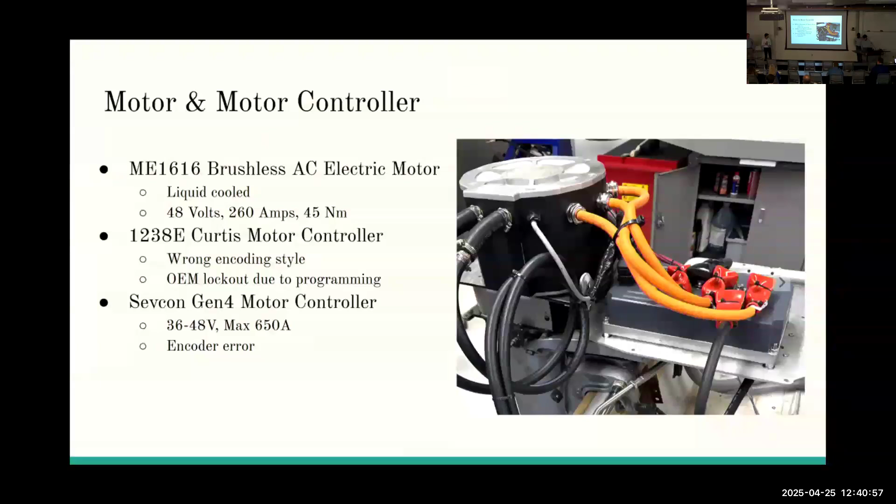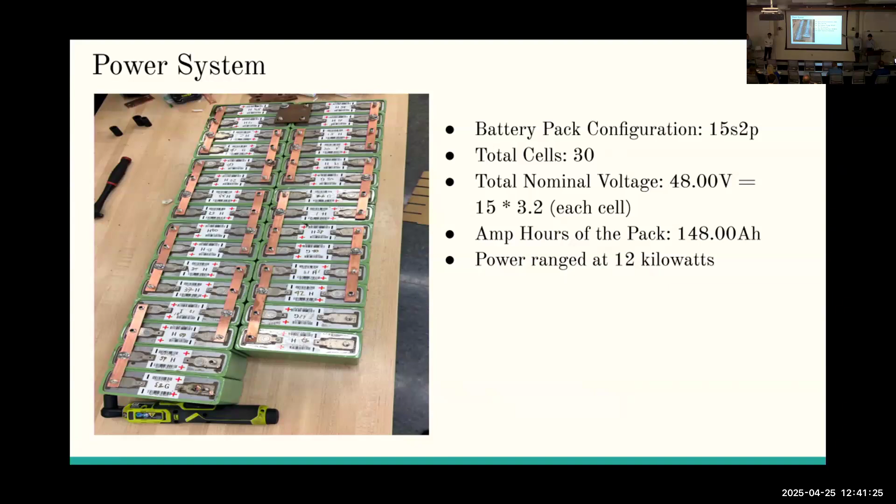Next up, we have our power system. This is just an image of our orientation of our batteries. We had a total of 30 cells giving us 48 volts. The total power of the pack was around 12 kilowatts, and the amp hour of the pack was 148 amp hours. Here we have 16 cells on the left and 14 cells on the right with 2 open connections for 2 negative terminals and 2 positive terminals that led to the power flow of our boat going straight to the motor.

Then our next challenge was transferring the power. We made this L-jaw coupling, but it had a weird spline gear in that outboard assembly. We had to cut off the crankshaft, which was originally mated to it, and machined it down to fit into that coupling to actually transfer the power down the shaft.

As the team was discussing earlier, the steering system last year wasn't the most efficient, so we wanted to improve on that as much as we could. So we designed and built our own steering housing that was bracketed into the two benches within the hull. There are two angle bars welded by our own Barry Keithsill, welded together to other steel plates as well, and then bolted into the bench, where that held the rotary steering kit that we were able to purchase from Amazon. It came pretty quickly and was easy to apply, and that was very stationary. That's what kept it that way.

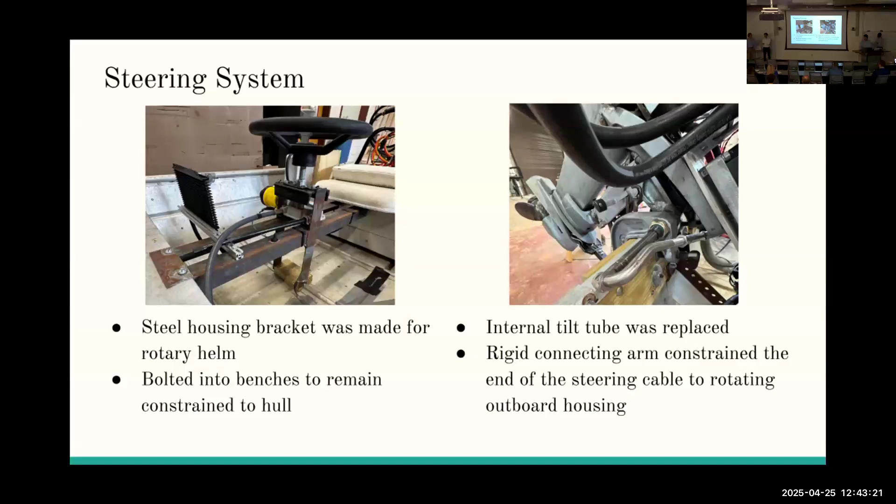After we got everything assembled and connected to the boat, we did three rounds of testing in Salem Lake and Belews Lake. The first round was amazing, handled like a dream, super fun. We went back the next day, and it was great for about 15 minutes, then the controller threw an error. We couldn't get it fixed that day, but about three days later we did get it running again and went to our final round of testing in Salem Lake, the day before we were supposed to leave for Virginia Beach. That's where we achieved a top speed of 18 miles an hour in calm conditions, and we were ready to put the boat on the trailer and drive to Virginia Beach for the competition.

We did the qualifying round, and that was good until we tried to put the boat on the trailer, when the controller broke again. So we spent the rest of that day trying to fix it, and even though we did find some wiring misconnections inside the motor, that didn't fix our error, and that led us to getting a new controller shipped overnight.

So then finally coming to race day—the controller shipped overnight and it came in at 10 a.m. We raced at 1 p.m., so we were on a bit of a tight timeline, to say the very least.

But once we actually had it functioning and operating, we were able to push it into the water and it operated beautifully. We only operated at about 75% power during the race because we didn't want to risk any issues with the motor, since we'd been having some iffiness here or there. We operated at about 12 miles an hour and finished 5 miles in about 25 or so minutes. Around the other planing hulls, we placed second against another 15 or so teams in the competition, beating reigning champion Princeton, which has aggressive amounts of funding for their boat.

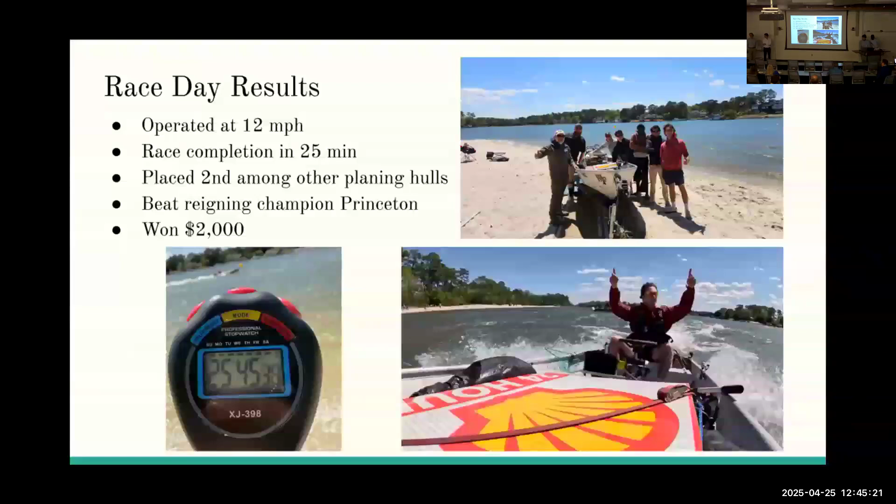Obviously this was an aggressively complicated project. We've had a fantastic time with it, but obviously we could not have done this ourselves, so there's plenty of thank yous we have to give to everybody.

Joel, the parking lot guy, for allowing us to charge our batteries beforehand. Dr. Briscoe, who was running the event itself. The DOT, Department of Transportation, for donating signs to use for our battery box. Obviously Professor Crow for all the wisdom he's given us. And then Mr. Mulder and Nick Golden as well for all the assistance when it came to actually machining some of the components of the hull. So thank you guys so much—it would not have been possible without you.

Thank you, everybody. Type shit.

We got no time for questions. You guys went over budget and overtime.

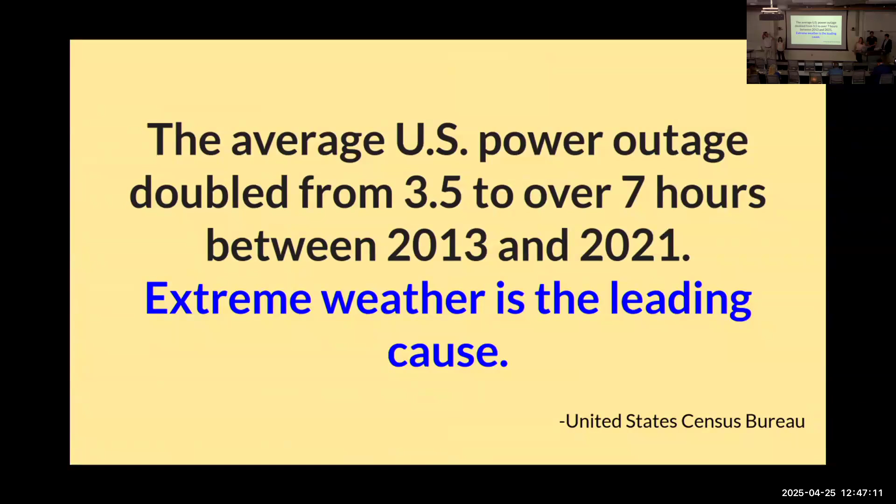Power outages across America are becoming longer lasting and more frequent. According to the U.S. Census Bureau, the average U.S. power outage has doubled from 3.5 hours to 7 hours between 2013 and 2021, with extreme weather being the leading cause. This can have major effects, especially on vulnerable communities. For example, in 2023, around 14.5 million households reported having medical devices that required electricity to operate, and nearly a third of these households were affected by power outages.

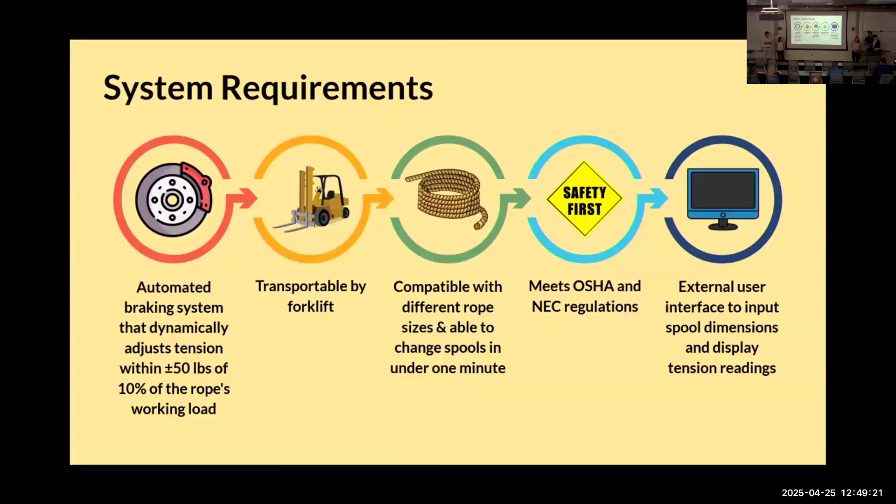The encoder and the pressure sensor send their information over to the Arduino microcontroller. That does a bunch of math, calculates what the tension is, and compares it to what our target is. Then a stepper motor will drive our braking system, which will either increase or decrease the pressure in the brake and allow more or less motion.

Okay, so all this is well and good, a lot of electrical components, but they need power, right? So we've been collaborating a lot with Altec, the operators on the Altec production floor. And we realized they need to be moving this loading system all the time, so we can't use outlets on the floor because you never know when they're loading. So we need a way to power this thing mobily.

But we also know that operators love their Milwaukee batteries. For whatever reason, they just love them. So we said, all right, we'll power the whole thing off a Milwaukee battery. That means we have to step the voltage up to 24 volts when powering the actual stepper motor, as well as the pressure transducer, and step it down to power the Arduino Mega and the encoder.

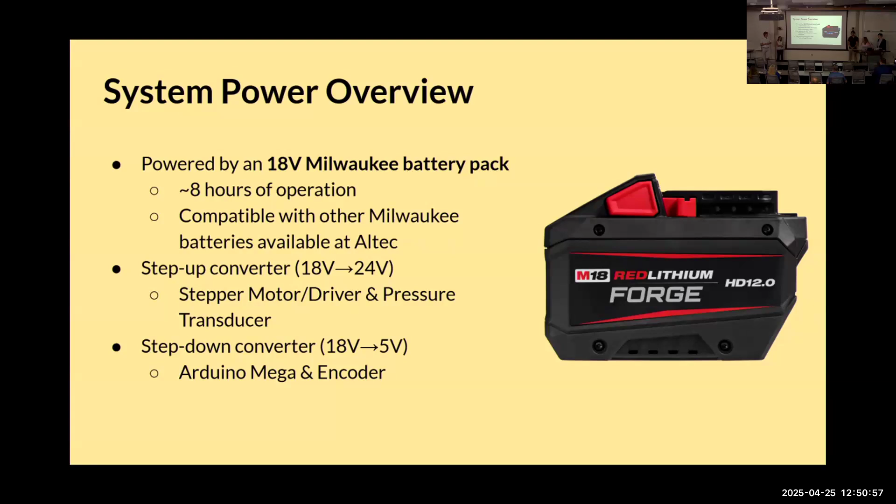So we collaborated with Altec, and they actually machined us an entire steel prototype, which is awesome. We got this spool here that simulates the puller tensioner truck. This will be pulling against our system here, which will be resisting it, creating the tension in the line. This motor spins, we adjust the brake on this part using the stepper, we drive the screw in, it compresses the brake, similar to any brake on a car, right? And that tension there is created.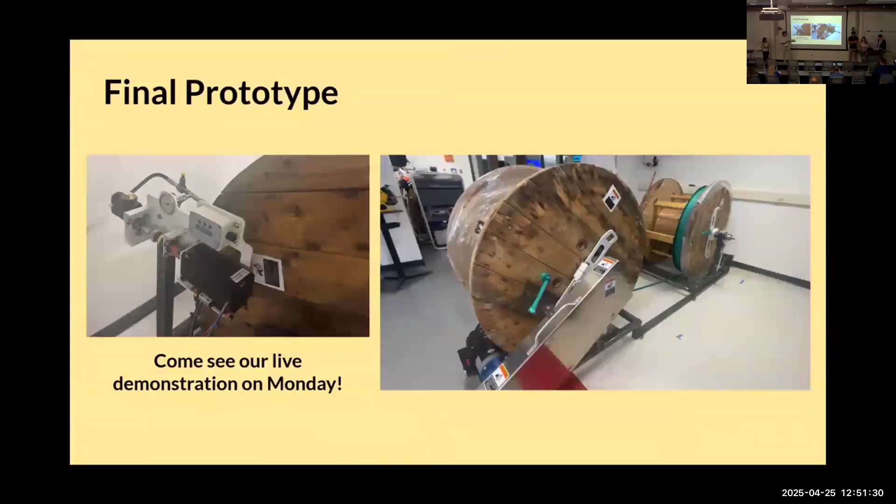Next slide. So given our system requirements, it works. We were able to drive the motor. We were able to read the tension, drive the motor to the correct distance in the screw, and create the tension within our given limits from Altec. It meets all OSHA and NEC standards. It's compatible with any rope size they use, and they change rope sizes a lot, we just have to change the inputs. But we were unable to make the UI that user-friendly, so we'll have to train Altec.

We're expecting our system to have many societal impacts. On the social side, we're hoping that this enhances safety and efficiency during power outage relief and reduces manual labor, since this eliminates the operator turning and manually adjusting the brake.

On the environmental side, we are hoping that this minimizes waste and energy consumption by using a rechargeable battery, and it enables quicker power outage relief to lessen effects to the environment.

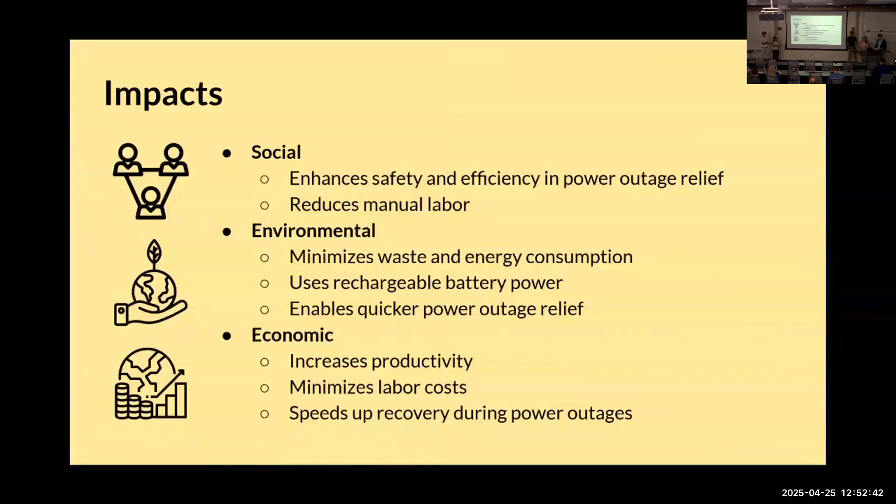On the economic side, this increases productivity and minimizes labor costs by reducing the manual labor. And we're hoping this speeds up recovering during power outages, which can be very, very expensive for communities, and hopefully get some profit for Altec.

So in the future, we want to deliver our prototype to Altec and give them the documentation and instructions on how to use it. Right now, we just have it implemented on a small scale prototype, so we would like to implement it on a full size A-frame that they actually use at the Altec facility.

We also still need to get working on that UI in the future, just so that they can update parameters depending on different spool sizes and different rope characteristics. And then lastly, we want to upgrade our microcontroller. We have an Arduino Mega, and we figured that it might be better to get a more robust microcontroller meant for actual industry applications.

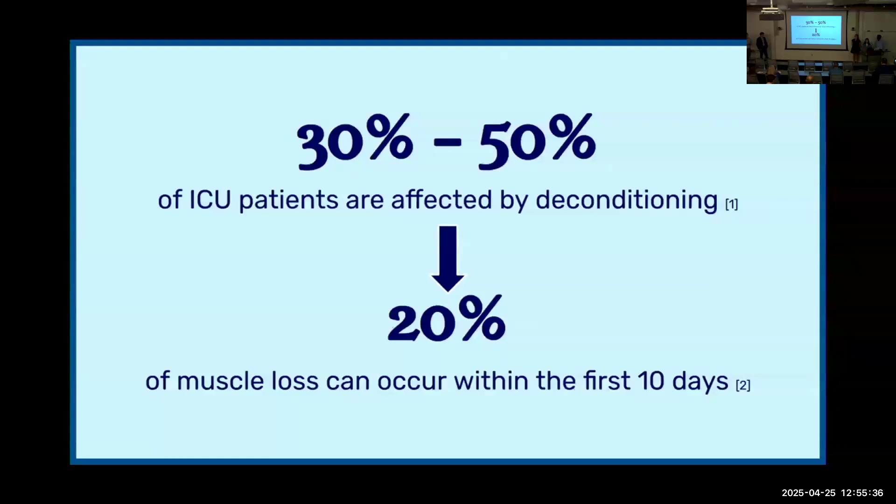So to avoid those problems, our broader impact goals include a decreased patient medical bill and saving money for hospitals, because it costs thousands of dollars per day to stay in the ICU.

Socially, shorter hospital stays are obviously associated with improved mental and physical health, and avoiding post-discharge rehab will also improve mental and physical outcomes. Environmentally, we make sure to use reusable, recyclable, and eco-friendly materials to improve sustainability and limit manufacturing emissions.

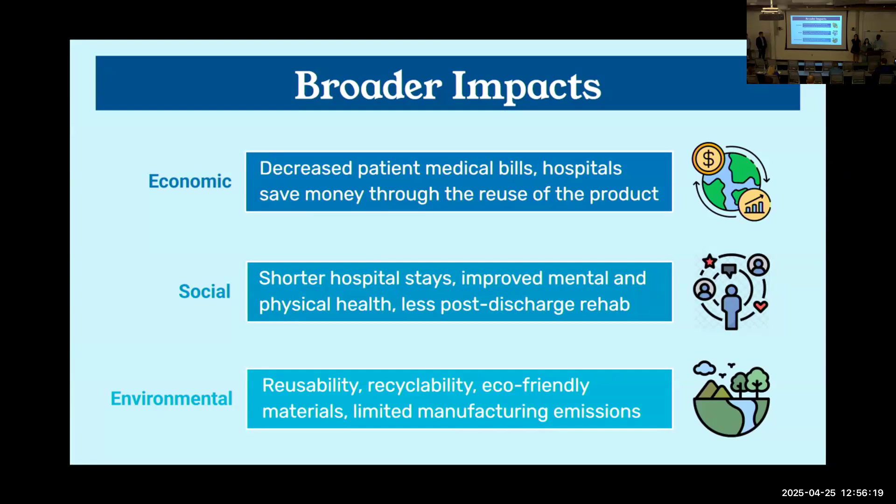So onto our mission, to address our problems, we have a lot of these methods. We've been working to build an affordable exercise apparatus that is safe, easy to use, and most importantly, effectively activates the muscles of the legs through active and passive motion. This way we can get patients out of their beds as fast as possible.

That has led us to come up with 5 overall system requirements to optimize both the patient and the hospital staff experience when working with this device. So the first one is that it's functional.

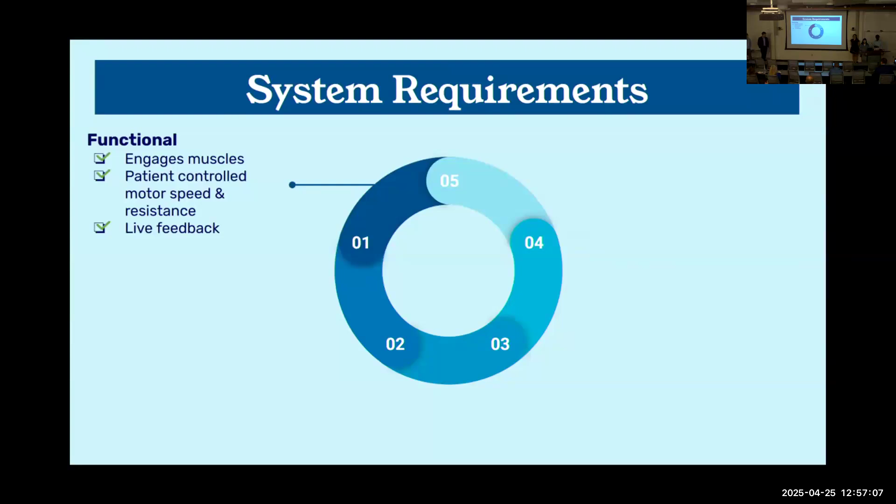We wanted our product to engage the correct leg muscles as verified through electromyography testing. It also has patient-controlled motor speed as well as variable resistance, and gives live feedback in the form of a touchscreen user interface.

Our next one is that it's compatible. We wanted to make sure that it fits on the Stryker bed so that it makes for easy sliding in and out, as well as fulfills regulatory codes and standards.

And then the third one is that it is adjustable to cater to all patients' sizes and ages. So we wanted to have various heights, calf circumferences, as well as overall movement.

Safety is critical in an ICU setting, so to ensure that our device is safe, we put in an emergency stop switch on the remote so that the patient is able to access it at any time throughout their workout, along with a stability feature to prevent any erratic movement of the lower limbs for patients with less control. Finally, we wanted this to be easy to implement because hospital staff is already busy as is in their day-to-day.

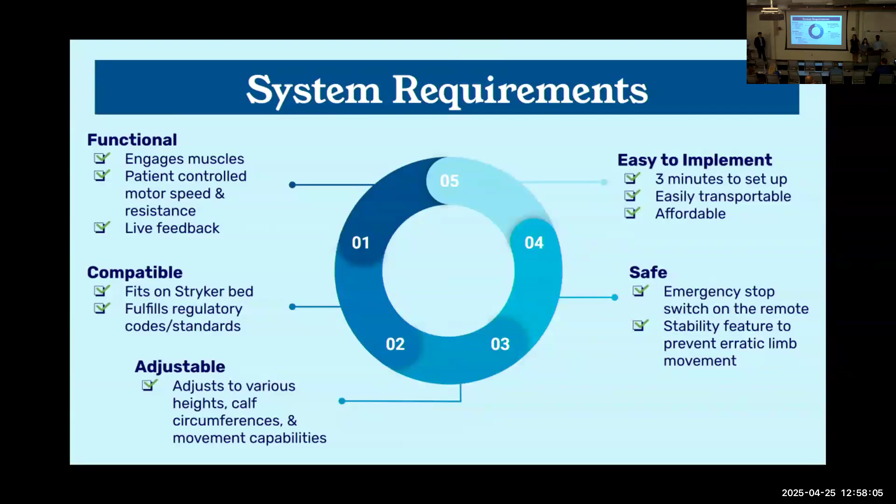We wanted to ensure that our device took only 3 minutes to set up, was easily transportable from room to room, and was affordable for healthcare systems to acquire.

So that brings us to our solution. Centered here is our 3D model, and starting from left to right, I'm going to go over the specific components.

Starting on the left, we have our compatible footboard with insertion poles that go into the footboard of the Stryker bed once you take out the existing footboard. Screwed into the back of the footboard is the electrical system that houses all the electrical components, which Robbie will get into later. At the top, you can see the touchscreen user interface that, when someone is pedaling, displays heart rate, cadence, and power output of the bed bike.

Switching to the other side of the footboard, we have our height adjustability feature, which due to its telescoping tube feature can cater to those various leg lengths that I talked about earlier.

Moving to the middle, we have our PLA casing, which houses our brushless DC motor, facilitating both passive and active motion. Passive motion is when your legs are strapped in and the bed bike does the pedaling for you, whereas active motion is when you pedal yourself with variable resistance.

And as you look towards the extremities, you can see the lower limb stability cuffs. That's for calf support and ensures patient safety and prevents injury.

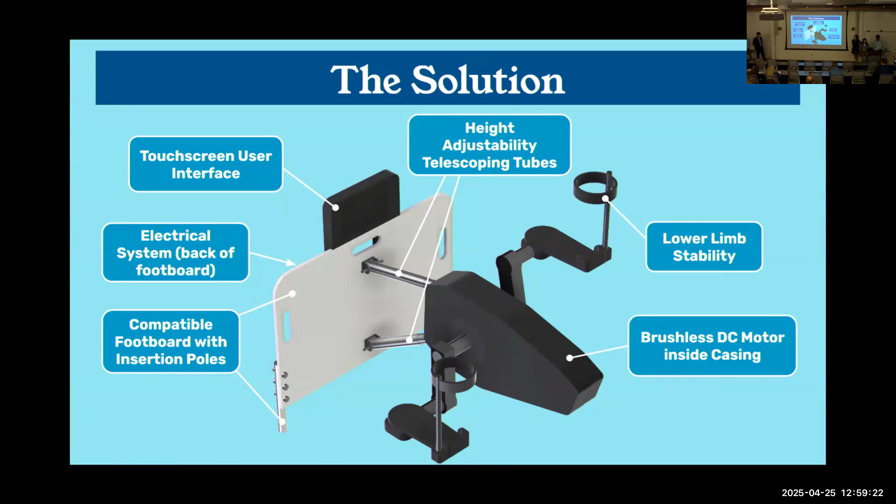So after planning and designing, we want to manufacture it. Everybody on the team specializes in one feature of our product and works tirelessly to bring it to life. The first thing I want to talk about is Stryker bed compatibility.

This is a really important concept for our project because we make sure our product is compatible with the bed. We've made our product easily installed in seconds so that nurses can set it and forget it.

Moving on to the motor, we have active and passive motion. This has multiple speeds and multi-resistance; the active and passive motion can be adjusted through a dial, and we also have an emergency stop to protect patients.

As far as the workout feedback screen, it shows your cadence, your heart rate, and your power, as well as past workouts so the patient can keep track of their progress over time. We also have dual axis adjustability that makes sure our system fits all heights and sizes.

And lastly, we have a leg brace for all the pedaling. There's a lot going on mechanically and electrically behind this system.

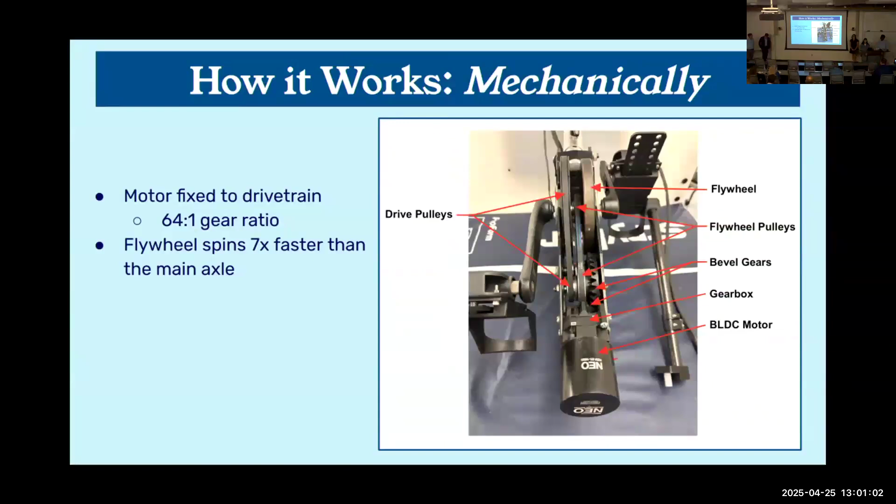When the switch is turned on, a set of relays disconnect the resistors, and the motor draws current into the line. The resistance level and motor speed are controlled by the Arduino based on user input. A Raspberry Pi is also utilized to run the direct application, with a sensor calculating power output simultaneously.

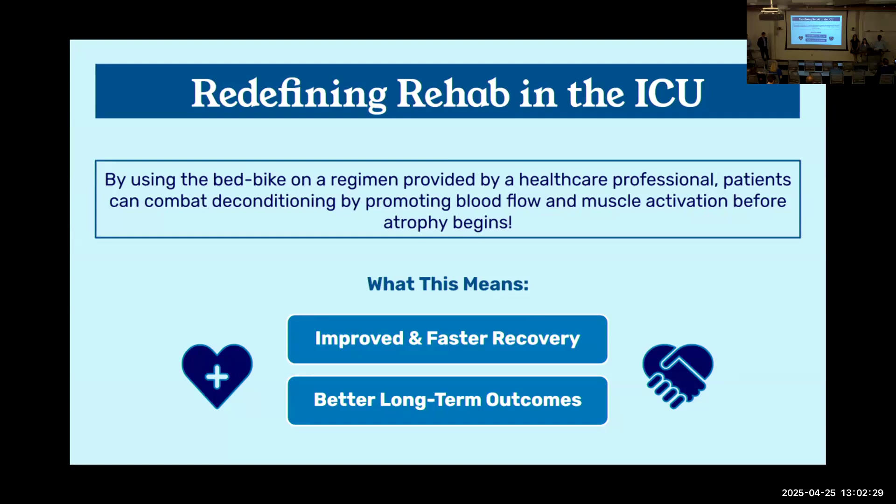So join us in redefining rehab in the ICU. By using our bed bike apparatus on a regimen provided by a healthcare professional, patients can combat deconditioning before atrophy begins. This would mean improved and faster recovery for ICU patients, decreased length of in-hospital stays, and patients may be discharged straight home with minimal hospital intervention, saving patients and hospitals money.

Thank you. Questions?